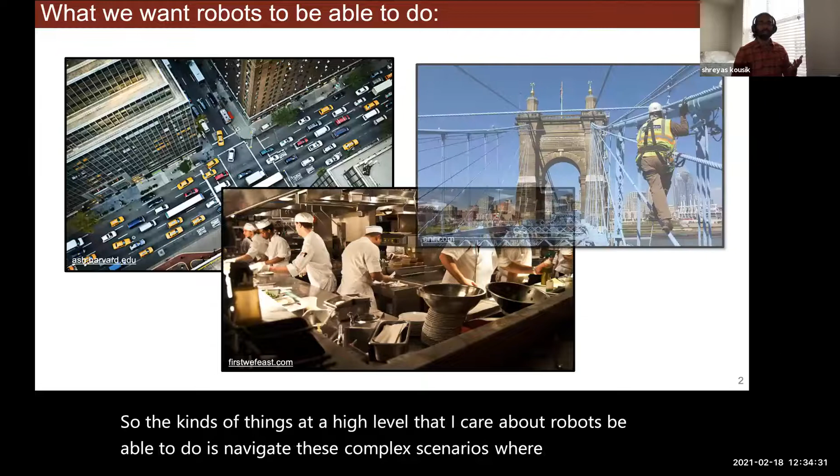So the kinds of things at a high level that I care about robots being able to do is navigate these complex scenarios where you may be interacting with humans or taking over jobs that are dangerous or difficult for humans to do.

However, to really accept these things into society, we need them to be safe. So we want to make formal guarantees about what they're going to do before we put them out into the field. However, that can often lead to conservatism. So the whole game in the motion planning world, as far as I'm concerned, is balancing safety and conservatism while still getting these robots to do stuff.

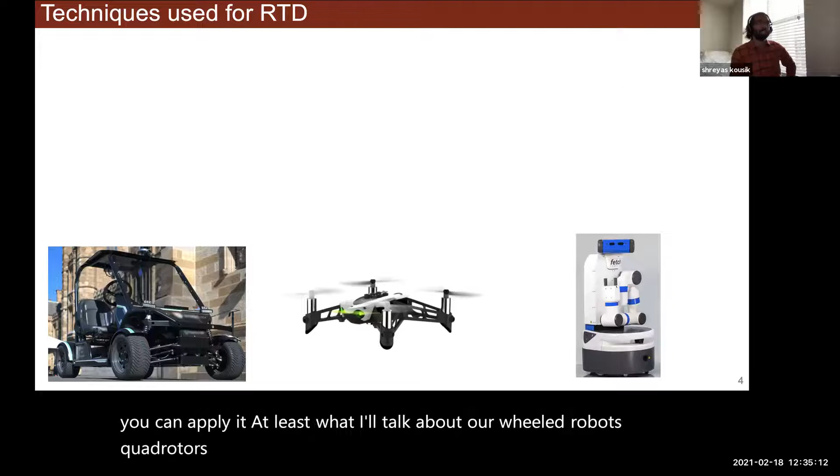RTD in particular is a technique that has grown out of a bunch of reachability analysis methods, which I'll discuss. You can apply it to wheeled robots, quadrotors, and manipulators most recently. The techniques we use to make this possible are split between whether they do things for safety guarantees or whether we're trying to do real-time planning. I'll also explain why the real-time aspect is important in a bit.

On the safety guarantee side, we spent a lot of time at Michigan thinking about how to model these systems and then learning about different reachability analysis techniques that make it so you can make strong guarantees. On the real-time planning side, I've spent a lot of time figuring out how to represent obstacles in a discretized way, or in general, in ways that make it tractable to solve non-convex, nonlinear optimization programs really fast. And we've also figured out ways to make it parallelizable.

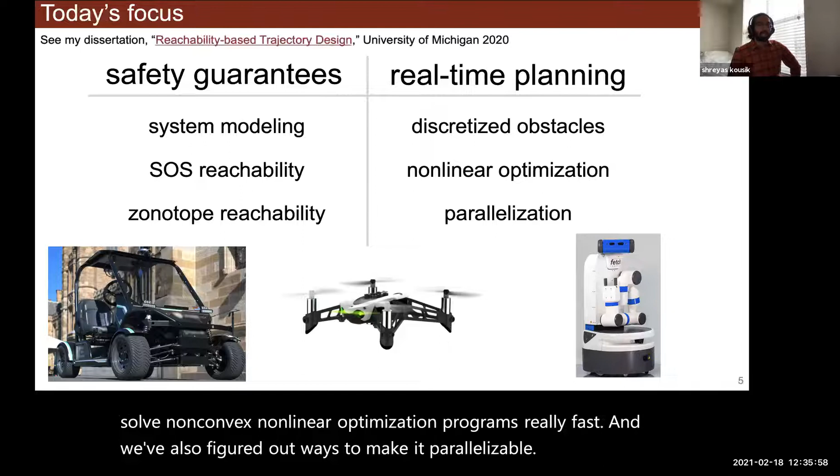I'd say for today, what we're going to focus on is the sums of squares reachability that we've applied to wheeled robots, and then Zonotope reachability applied to drones. On this slide, I'll reference dissertation chapters in case you're curious, because I think it's quite a gentle but deep introduction to all of these techniques.

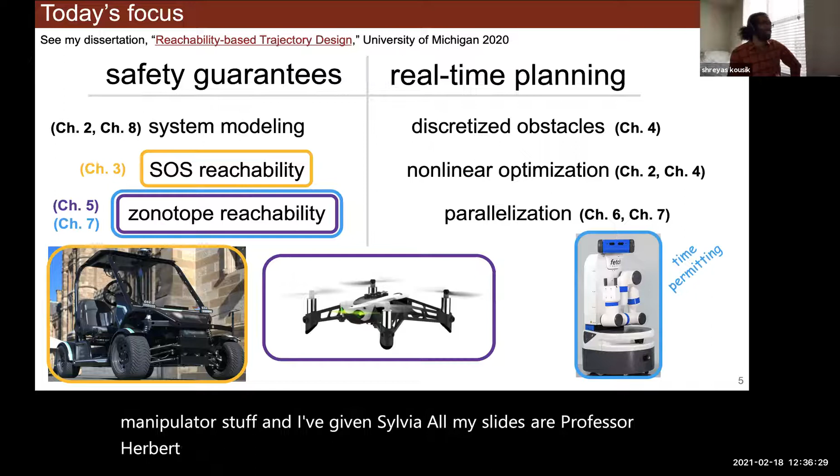Time permitting, hopefully we can get into the fetch robot manipulator stuff. I've given Sylvia, or Professor Herbert, all my slides so that you can all reference it afterwards if you need. So before we dive into anything, I'll just show you a little video.

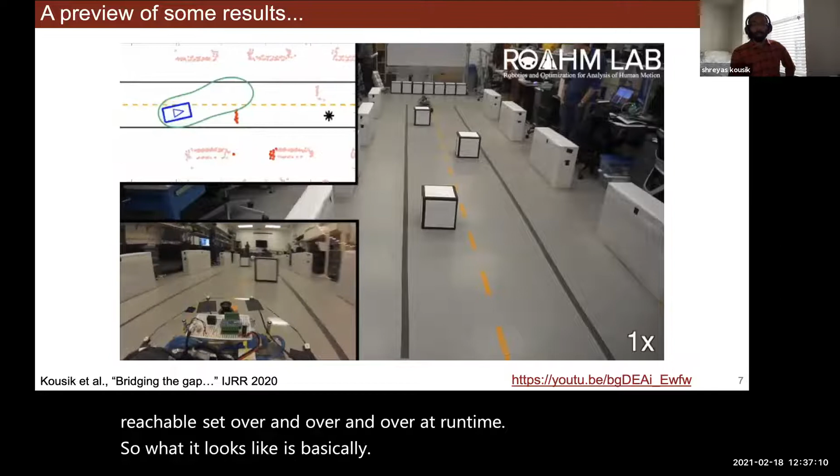Here we have this robot's own view of the world in the top left. We have a camera on the robot in the bottom left. We set up this little mock road and tossed some obstacles around. And then we give the robot a waypoint in a receding horizon way. It sees these obstacles detected with a LiDAR in red. It sees itself as a blue rectangle, and then it's computing this green blob, this reachable set, over and over at runtime. So what it looks like is basically what we hope to see: that the robot can do stuff autonomously and not crash.

I'll now explain what's going on behind or under the hood of that process. Before I continue, feel free to interrupt with questions at any time. Just unmute yourselves, that'll be the easiest for me.

All right, so first, some background. I'll try and relate this to what you already have seen.

Full disclosure, I just converted these slides from Michigan colors to Stanford colors, hence the left side of the road is now suddenly blue. So just ignore whatever conventions you know about driving. All you care about right now is safety.

To make a robot drive safely, we typically set up a receding horizon planning framework where the robot will be trying to get down the road, perhaps to this golden star goal position. Of course, there's stuff in the way, and the robot's sensing capabilities are not perfect, they are limited. So we adopt a receding horizon strategy, wherein we set up a waypoint, something intermediate between where the robot is and where it needs to go, plan a short trajectory using ideally a simplified planning model that is really fast for computation. And then the robot does what it wants to do to track that trajectory, which may not be perfect.

Often we can describe the motion of the robot with what we call a high fidelity model. And you'll notice that both of these models are written as ordinary differential equations. That's the way I'll be talking about modeling a robot throughout this talk. But I can relate this to other types of models you may have seen in the literature later on. Anyways, by repeating this process of setting up a waypoint, planning a trajectory, and tracking it, ideally we can eventually get our robot to the goal.

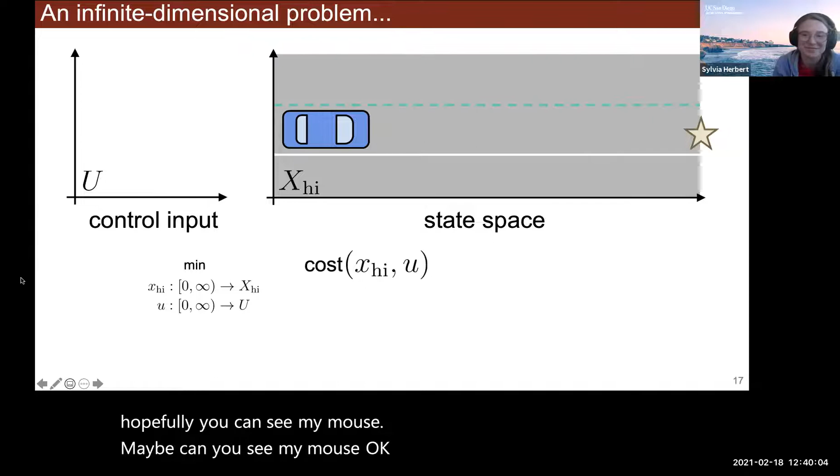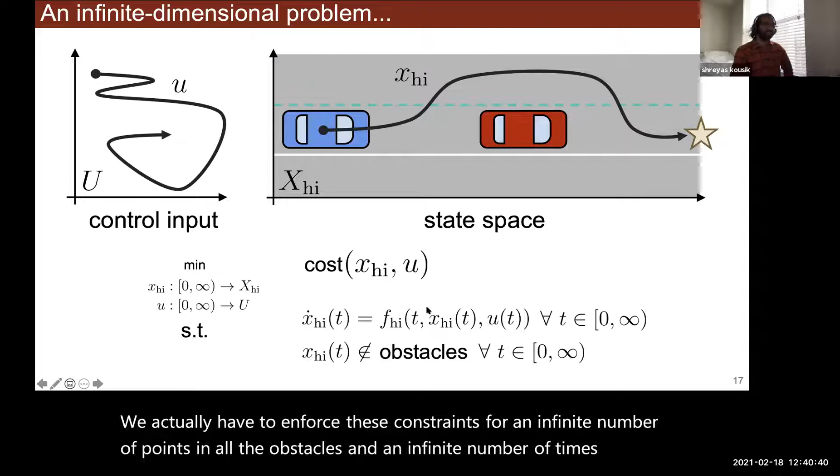So we want to minimize over the trajectory of the robot and its control inputs for perhaps for all time, some arbitrary cost, subject to the fact that we have a high fidelity model, and we don't want that model to intersect with obstacles in its position or workspace coordinates. So an optimal solution may do some wiggly thing in the control space, and it'll produce some good trajectory in the state space. Unfortunately, we actually have to enforce these constraints for an infinite number of points in all the obstacles and an infinite number of times. So it is an infinite dimensional program because the size of the decision variable space is infinitely large.

You can never put this on a computer, but you can always represent a finite dimensional problem on a computer. In the RTD case, we've taken a particular tack that lets us get to that finite dimensional computational representation. The first thing we do is we minimize over what I'll call trajectory parameters, and I'll illustrate what those are shortly. So this is drawn from a finite dimensional space, and the cost is translated into this finite dimensional variable. We then represent obstacles in this space, and then we decide what trajectories to choose over this, the complement of this unsafe set, let's say. We also choose a finite amount of time. And in fact, we represent the entire interval, not just discrete points in the interval.

So we're still, in some sense, solving an infinite problem, but we're very clever about how we represent it. Hopefully, this problem looks a little bit simpler to solve. And if you're not familiar with this type of optimization notation, don't worry, you'll see lots of it, and I can explain it in more detail as we go. A solution to this problem might look like this. And then we'll solve this little problem that you see down here over and over and over as the car or robot in general is moving through the world.

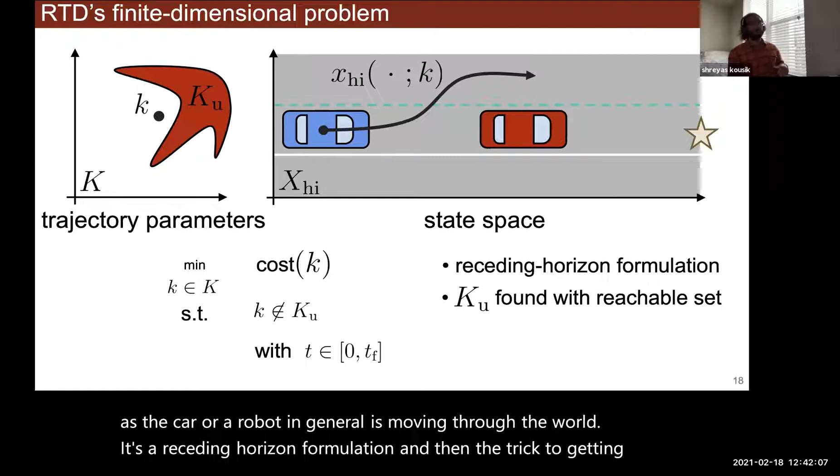It's a receding horizon formulation. And then the trick to getting this unsafe set is to use reachability analysis over and over and over.

Now, to ground this in a broader context, let me talk about where RTD fits in the scope of other methods. Typically, for making a robot move through the world, we look at a high-level planner that ignores the dynamics of the robot and generates those waypoints that you saw. This hands its output to a trajectory planner that tries to compute some short trajectory to achieve a goal. And finally, a tracking controller tries its best to track that trajectory perfectly. At the high level, you may be familiar with rapidly exploring random trees or A*, prototypical high-level planning algorithms that will spit out waypoints really fast, but they pay a trade-off the more complex you try and model the dynamics in these types of planners.

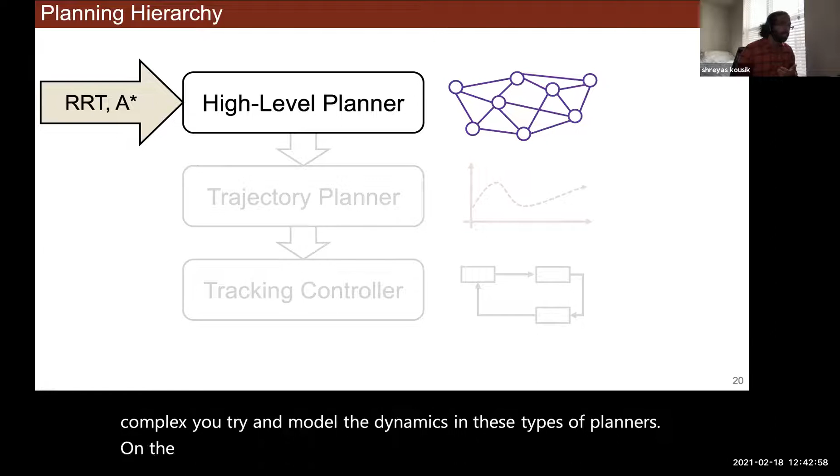On the other hand, at the lowest level, well, here we go. I'm skipping a couple slides. Okay, at the lowest level, you may see things like control barrier functions or model predictive control. And I believe Jason Choi gave a talk about CBFs. I'll point out in cartoon form how this works.

But the idea of this is, given a trajectory, how do I track it as well as possible? Mostly this cartoon is just to give you guys a short illustration of FaSTrack, which I think is super cool. So imagine I have my car and it's allowed to do whatever it wants in the world, and I just have to track that decision as well as I can. If I can compute a reachable set of the tracking error, then at runtime I can use that reachable set to essentially dilate obstacles. And so no matter what my plan for my car does, as long as it lives outside of these dilated obstacles, I know my car will not crash despite tracking error. So this is the type of object you can get from Hamilton-Jacobi reachability.

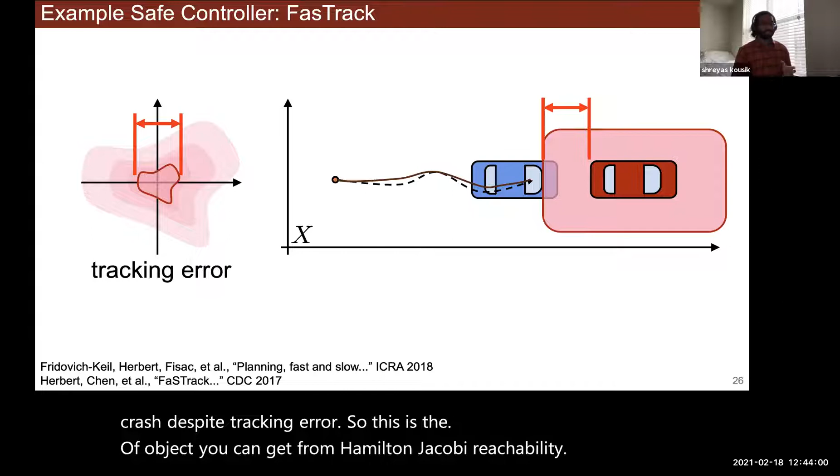So a similar technique is to apply control barrier functions. Often what you'll see is a nominal trajectory. In this case, let's say we're driving in a straight line, and that corresponds to some nominal control input shown on the left. When an obstacle appears, we want to construct constraints on the space of control inputs, and then solve a quadratic program that minimally corrects our control input. So we want to be as close to what we were trying to do while still being safe.

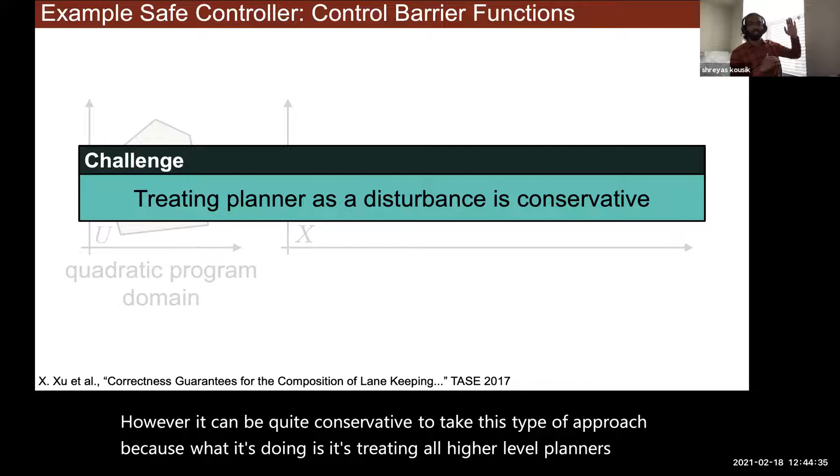However, it can be quite conservative to take this type of approach, because what it's doing is treating all higher level planners as a disturbance to the system. So that can be quite conservative. And hopefully you all have heard a little bit about this and have thought of ways to combat that conservatism. A bonus challenge specifically for CBFs is we don't know if that quadratic program is always feasible. Sometimes it is, and it's really cool. There's a work from Sam Coogan at Georgia Tech that recently shows how to ensure that that program is feasible. So it's not a problem that's unsolved, but sometimes it is. It's something to be cautious of.

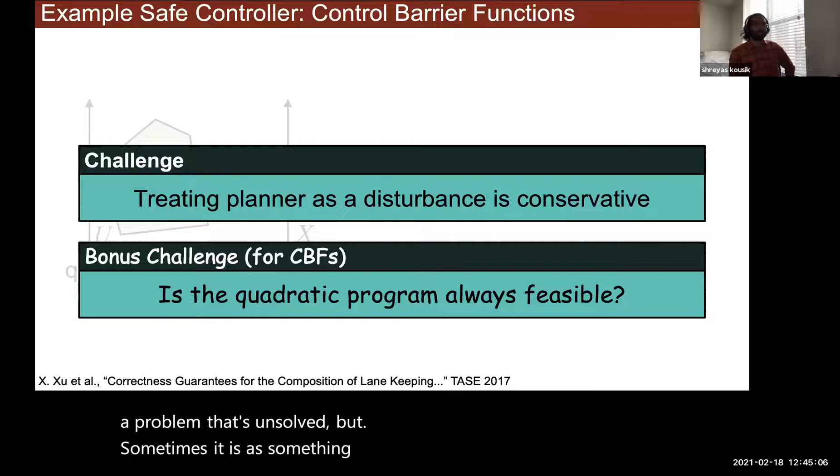To summarize this sort of literature review, RTD fits in right in the middle here. It's a trajectory planner that balances the model fidelity that would make high-level planning intractable and the conservatism that you can see with certain types of low-level tracking controllers by enforcing safety at this trajectory planner level. And at the end of the talk, I'll discuss why that's good and why that's bad.

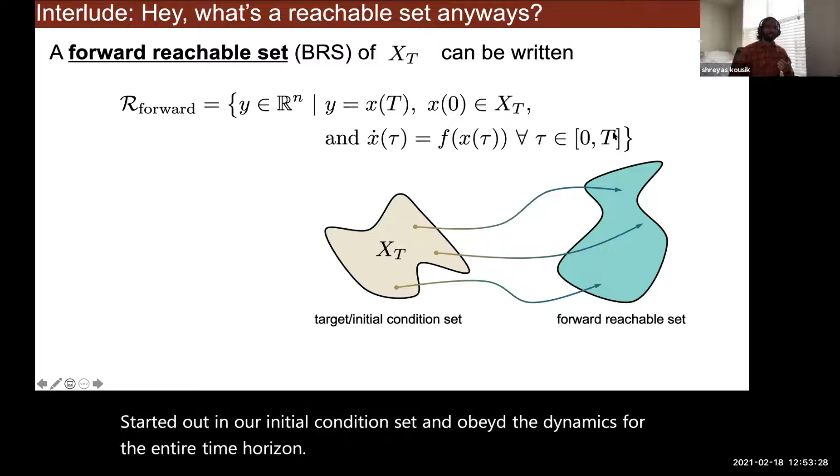We will also consider reachable tubes. In fact, all of the things that I'm calling reachable sets in this talk are actually reachable tubes. I haven't made the distinction between tubes and sets in my work, but if you're more familiar with the tube lingo, then think of all of the objects I talk about as reachable tubes.

I'll talk about wheeled robots, and I also point out none of this is solo work. All of these things have been put together by a lot of people working over many years, so I'll show their faces and names as we go.

In the wheeled robot case, I'll discuss how we parameterize trajectories, how we compute the forward reachable set offline, and then how we represent obstacles online. That's where I'll answer the dynamic obstacles question.

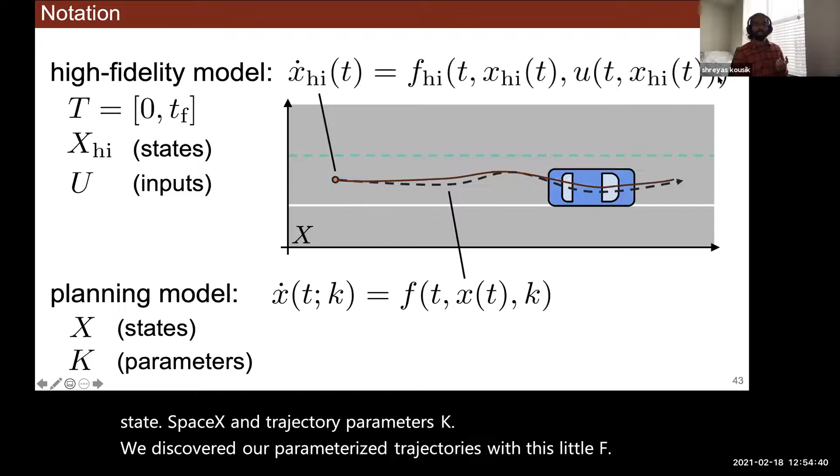For notation, as a reminder, our high fidelity model, our accurate description of the car, has time in this interval, high fidelity states and inputs. Our simplified planning model has a lower dimensional state space x and trajectory parameters k. We describe our parameterized trajectories with this little f, and our high fidelity model trajectories with this f high. Hopefully the notation will be very clear, and you should have the PDF of these slides to reference later as well.

Our trajectory parameterization: we found that just computing these Dubins path like arcs pretty much always works for cars because they're pretty short. What we do is parameterize a speed and yaw rate profile that travels at a constant for some time and then brakes down to zero at this final time in each plan.

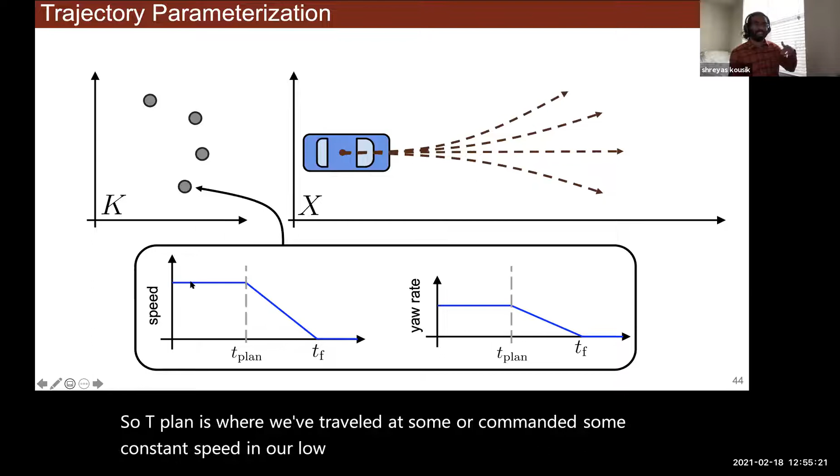T plan is where we've traveled at some commanded constant speed in our low dimensional model, and then we rely on our high fidelity model and tracking controller to track that behavior. By incorporating this type of braking maneuver in every single trajectory, no matter what we're doing, we always have a braking maneuver available as we stitch these short trajectories together over and over through time.

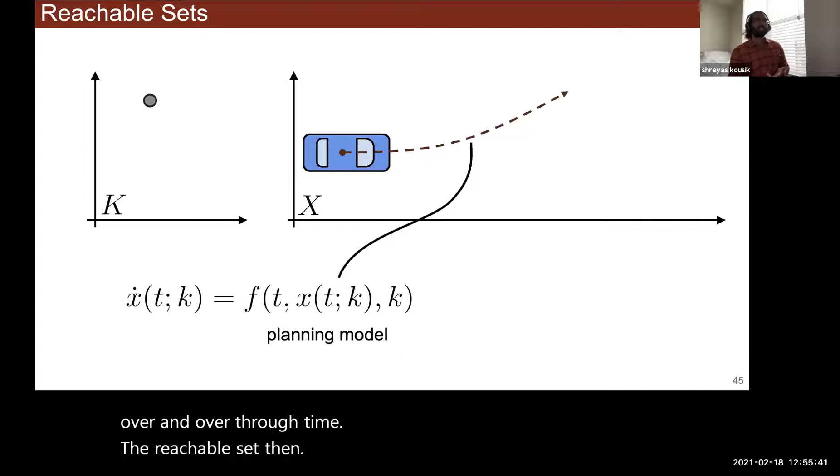The reachable set then is, given a trajectory of the planning model and whatever our high fidelity model may do, a blob surrounding that planning model trajectory that incorporates the behavior of the whole vehicle. We represent this as an additional G function, representing the tracking error, multiplied by a disturbance D. These two things together are what I call the tracking error model.

The disturbance in particular just goes from -1 to 1. So the idea is, if you can hold on to the tracking error conservatively, then you can solve basically this differential equation in a clever way and hold on to all possible trajectories despite tracking error.

Assuming this G function upper bounds the possible tracking error, you can choose that disturbance to basically drive the planning model trajectory, the simplified trajectory, to exactly match any of the high fidelity model trajectories in the states that you care about, so that lower dimensional state space.

Now, how do we actually hold on to this object on the computer? Consider again our simplified model, and this G function may look like this. This is taken from a bunch of traces of that rover robot you saw at the beginning of the talk. Then we fit G to upper bound all of the tracking errors.

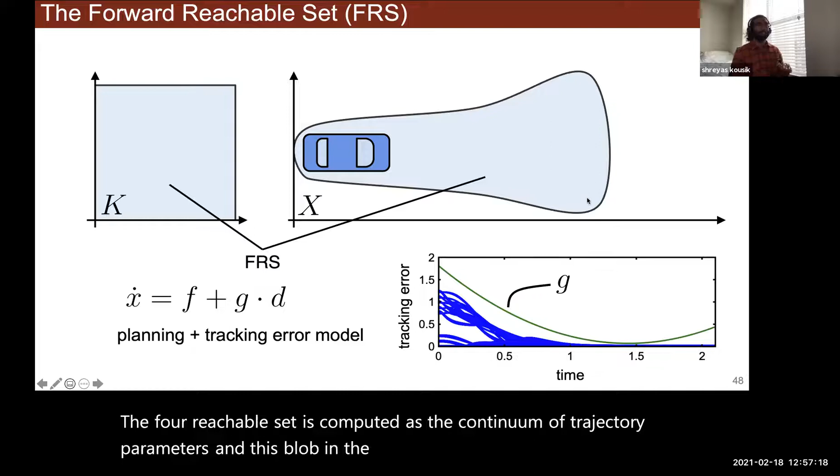The forward reachable set is computed as the continuum of trajectory parameters, this blob in the robot's lower dimensional planning space, using a sums of squares program, representing this blue forward reachable set object as a polynomial W.

We can show that given a point in workspace and in the parameter space, in this higher dimensional forward reachable set, the polynomial is greater than or equal to 1 on that point. So to test if I'm inside or outside the reachable set, I can just evaluate a polynomial and check if it's greater than or equal to 1.

So how do we compute that polynomial? Here's where sums of squares reachability analysis is the particular tool that we use, and that you can see in the RTD tutorial and the RTD repository for the Segway and the rover.

To compute the reachable set, we begin by setting up an optimization program where we're trying to optimize over these 3 polynomials, and we're trying to minimize the volume of W, so the integral over the states and parameters of whatever W is.

If we were to take W out to be a polynomial of infinite degree, then it would converge to an indicator function just on the FRS — 1 on the FRS and 0 everywhere else.

We add constraints to enforce the dynamics. So this V object here is basically acting as a Lyapunov function. It'll be negative and decreasing along trajectories.

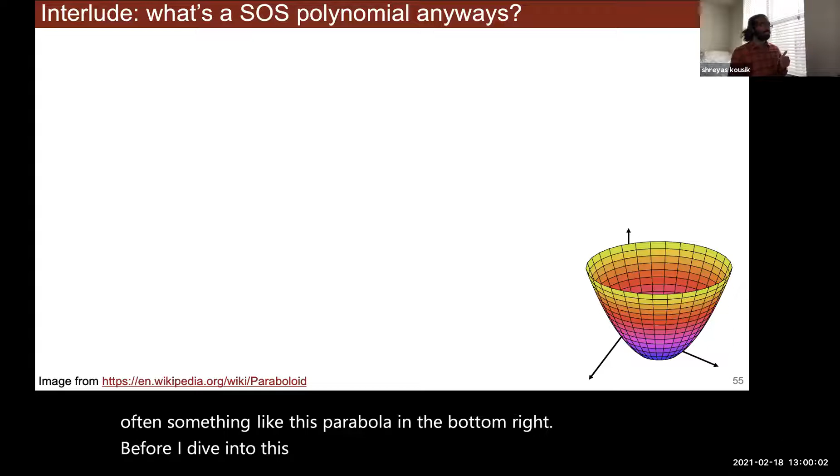Okay. Suppose we have some point in Rn and some arbitrary monomials. I've written the monomials as a function m, where I plug in x, and it's just some polynomials with only one term in the variables of x, or in the coordinates of x, let's say.

Suppose I have a matrix Q, a square matrix that's positive semi-definite. If you're not familiar with what that means, I don't have a definition in the slides for you, but you can — well, I'll leave the specific definition for later — think of it via the example on the next slide. That will be probably the easiest way to understand it.

If I write down a polynomial P, written as this M Q M transpose object, you can think of this as the dot product of M, these monomials, with themselves, multiplied through by Q. So this is a generic quadratic form.

Then what we've done is summed the squares of all the monomials with some coefficients. As long as the coefficients are chosen carefully, which is equivalent to Q being positive semi-definite, then we know that the polynomial P is positive everywhere.

So it takes an n-dimensional number and spits out a positive real number. Therefore, if we can find a sums of squares polynomial, then we can say that it's positive on the sets that we care about.

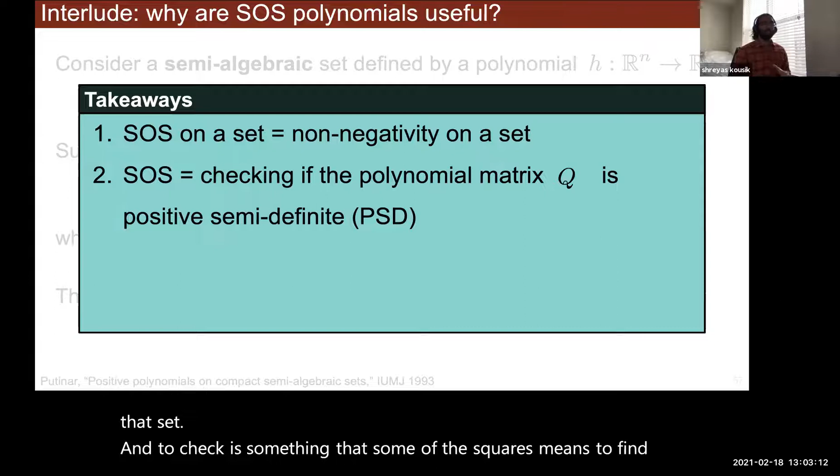Okay, so that was a lot of math to throw at you, but the big takeaways here are: sums of squares on a set is equivalent to non-negativity on that set. And to check if something is sums of squares means to find that positive semi-definite Q matrix that I mentioned earlier.

Critically, finding such a matrix can be done with semi-definite convex programming. It'll take a lot of memory because you're representing really large matrices, but it's convex, so it comes with optimality guarantees. This is the root of proving that we will find a polynomial that's greater than or equal to 1 on the reachable set. By representing everything with sums of squares polynomials, we can actually prove that this property holds.

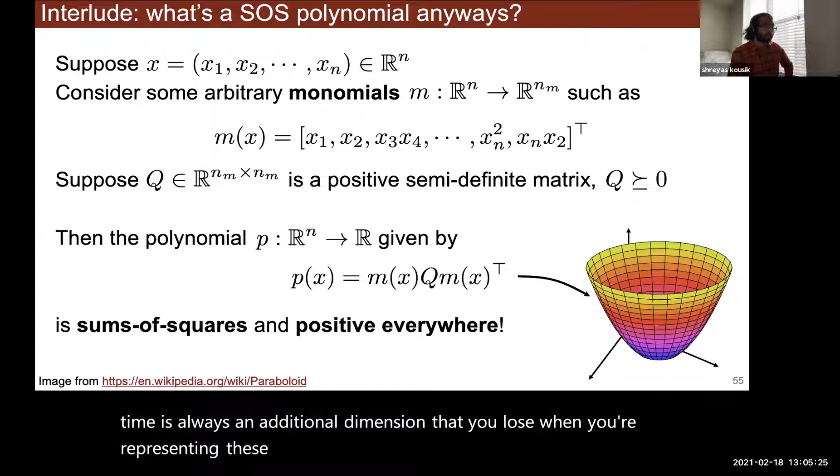It can be. So we've gotten up to 5 dimensions. Annoyingly enough, time is always an additional dimension that you lose when you're representing these things. So it's 4 dimensions plus time for all the wheeled robot stuff. 2 workspace dimensions, 2 trajectory parameter dimensions, and time.

The tricky part then is to be more clever about scaling it up. There's ways to do it with exploiting sparsity, so sparse sums of squares optimization. The problem is then the reachable set becomes much more conservative, so you end up with lower degree or less expressive shapes. Instead of a shape like the wibbly wobbly H thing that we saw earlier, you'll just get paraboloids or ellipsoids. That's the trade-off you pay with these polynomials.

And that's also why I haven't used them in a couple of years, because I thought zonotopes are cooler. We'll talk about zonotopes in a bit. Oh, Zootopia is apparently the subtitle for Zonotope.

That's great. Quick question. So you're saying that if the degree of polynomial is bigger, the rate of convergence is bigger too? Like how is it different in terms of rate of convergence?

Off the top of my head, I don't know. But in general, the semi-definite program that you set up is going to run much slower. That speed is because you're trying to hold on to a really large square matrix in memory, and you're holding on to just more stuff. So it's going to go slower.

I don't know what the rate is in terms of the rate of convergence as a function of the dimension or the degree. My understanding is it's exponential or close to exponential, which is unfortunate. And in practice, that's what I've seen as well. These things tend to blow up in how long it takes to solve.

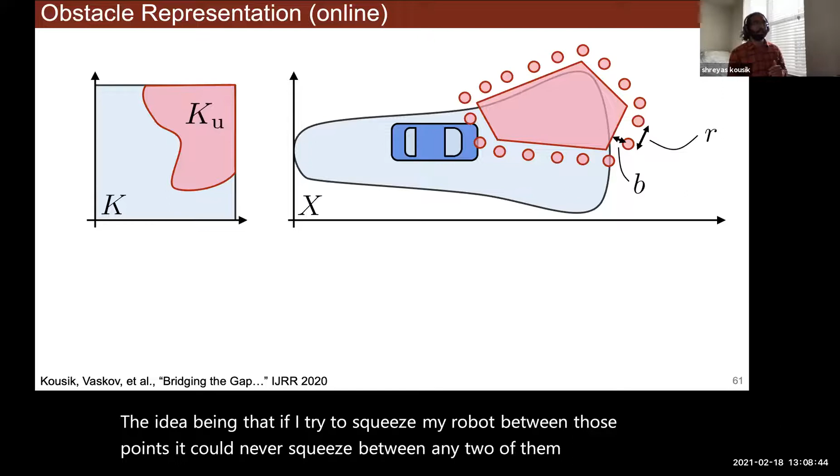So we prove that such a spacing exists for arbitrary polygonal obstacles, and that they're bounded when my robot is convex and compact. The reason this is useful is because if I have a finite number of points equivalent in some sense to my obstacle, then I can say, if I evaluate my forward reachable set polynomial and it's less than 1 on all of the points in the discretized obstacle, then I've chosen a safe trajectory parameter.

So what I've done is taken an infinite number of points and turned it into a finite number of points. And I can actually evaluate safety by evaluating a polynomial a finite number of times, which is super duper fast. So it might look something like this.

When I evaluate W on all of these points, it'll be a bunch of little blobs that provably cover the unsafe set. If I then choose a safe trajectory parameter, I know it avoids collision with all of these points, so it avoids collision with the obstacle.

This is strict inequality here, not less than or equals. So in practice, we pick some small epsilon to enforce this constraint.

But wait, dynamic obstacles work too in the same way. Suppose I'm given a prediction of a dynamic obstacle. And I'll point out, and hopefully you've noticed, I have not talked about perception at all through this talk. This is purely how do I plan once I know about the world. So if someone gives me a prediction of what another robot or vehicle is going to do, we can still find this unsafe set by discretizing in space and in time.

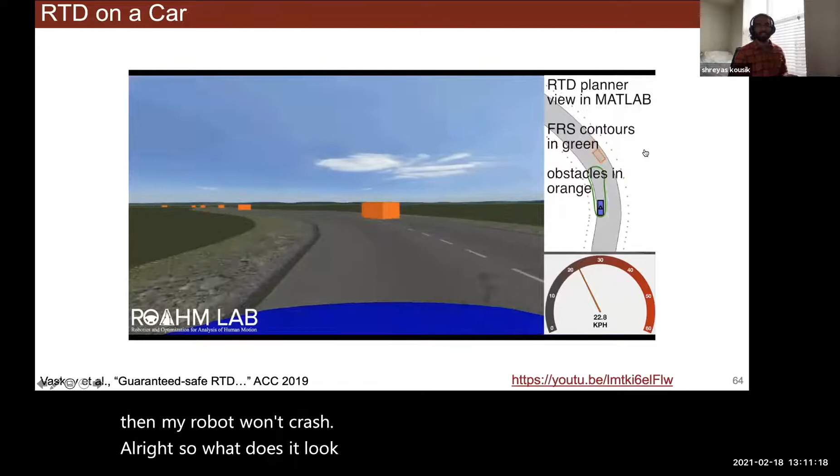All right, so what does it look like? Here's a car driving around with just random static obstacles on a 1 kilometer test loop, up to 35 miles per hour, which is the speed limit of the test loop. So we didn't pick that for any particular reason. It autonomously decides to make these lane change maneuvers around the boxes. And it slows down for corners because it knows it can't actually make the corner if it's going too fast, because the reachable set won't fit inside the road boundaries that we also show as discretized obstacles.

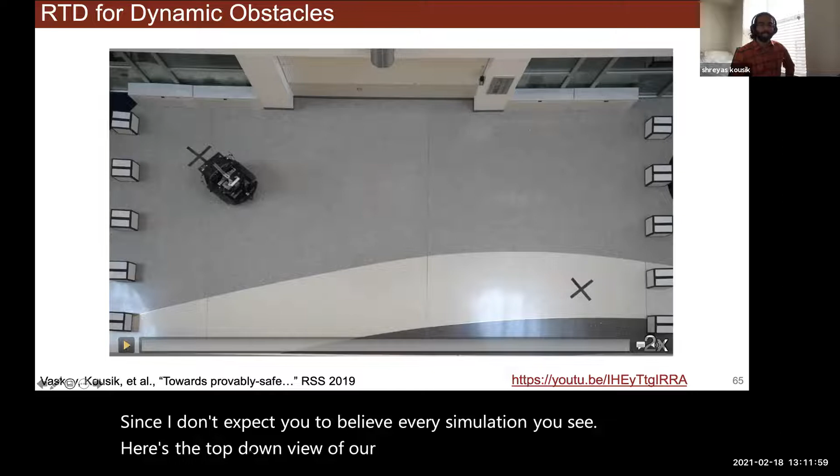Since I don't expect you to believe every simulation you see, here's the top-down view of our Segway robot at the University of Michigan, and it's going to dodge these dynamic obstacles.

Unfortunately, in this case, what we did is the obstacles don't react to the Segway at all, which turns them into really mean obstacles. It's like if you were walking towards somebody and they just walked right into you. So these scenarios all became really hard for the Segway to solve above 2 obstacles.

However, over many such scenarios, importantly, the Segway never caused a collision. It would always come to a safe stop, and then somebody else may come run into it. So we started discussing a notion of fault in a collision in the dynamic case. Things get a little muddy once you start talking about the possibility that other robots may come run into you, or other agents may come run into you.

Okay, so that covers at a high level, that gives you a flavor for how this works on the wheeled robot side. And I have a link to the tutorial, which goes into much more detail about all of this, but still in a gentle way.

I'll now discuss aerial robots, quadrotor drones in particular, to introduce a different way of computing that reachable set. Before I proceed, are there any questions on the wheeled robot side?

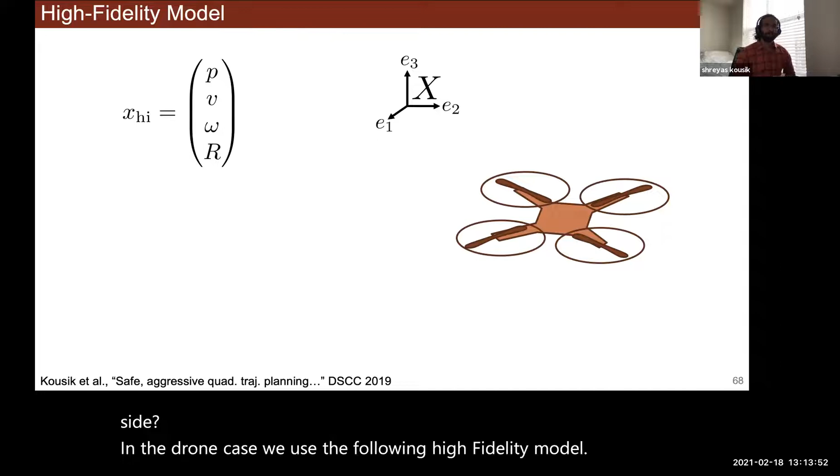All right. In the drone case, we use the following high fidelity model. We consider a three-dimensional workspace, and we look at the robot's position, velocity, angular velocity, and then R is a rotation matrix describing the attitude of the robot.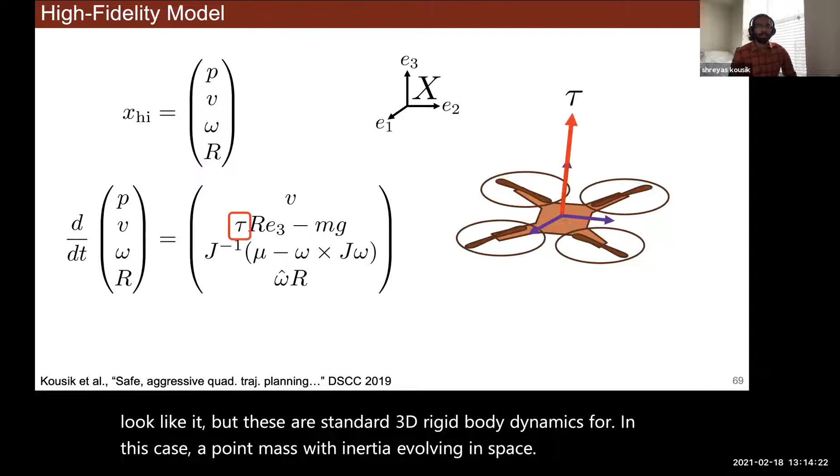One way to write down the dynamics here, maybe this doesn't look like it, but these are standard 3D rigid body dynamics for, in this case, a point mass with inertia evolving in space. The control inputs to the robot are the thrust, tau, and the body moment, mu.

And in general, planning with this model in real time is hard. However, some of you may be familiar with the differential flatness property of a quadrotor, where you can plan with a much simpler model and then track that much simpler model with all of the states that you see here on the left. That model in particular, we simplify by using these trajectory parameters.

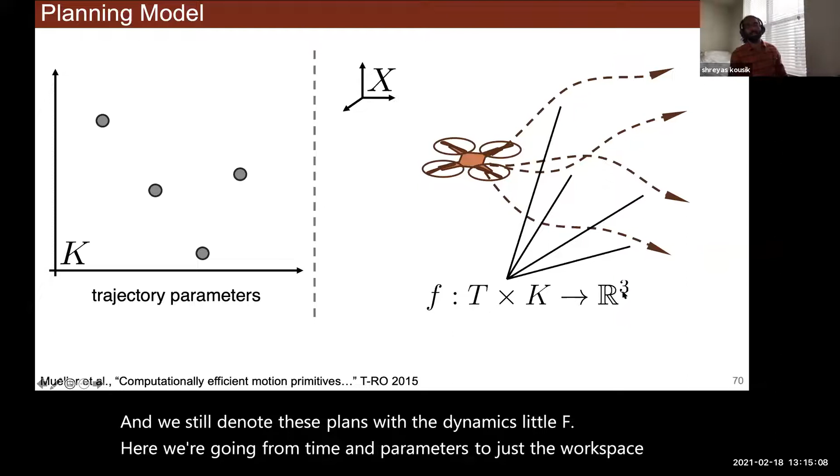So each point in the space, again, is a single plan in the workspace on the right. And we still denote these plans with the dynamics little f. Here, we're going from time and parameters to just the workspace. So R3, in this case, we specify the velocities of the center of mass of the robot, which is a lot less to specify than the velocities, angular velocities, and attitude matrices.

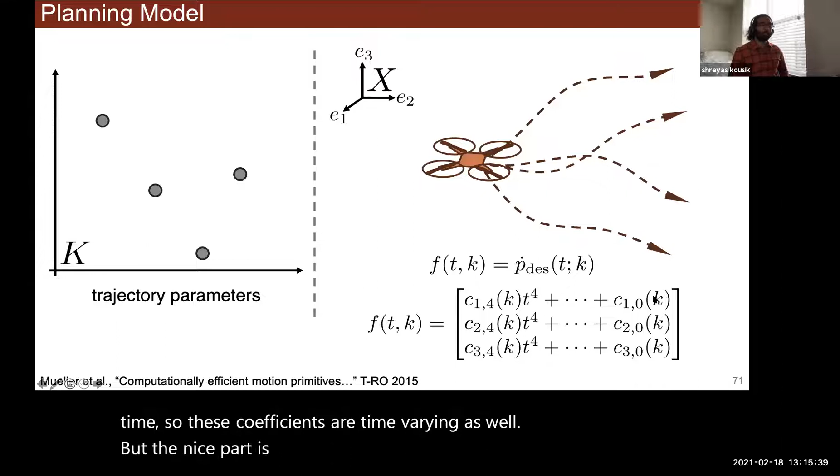So what you can think of this as is my simplified planning model specifies the velocities as a function of time and the parameters. And in particular, we construct these as polynomials that are piecewise varying in time, so these coefficients are time varying as well. But the nice part is then I have decoupled planning dynamics because I'm just looking at a separate polynomial in the X, Y, and Z dimensions of my robot.

This means I can actually compute a reachable set without having to compute the reachable set directly of the high dimensional model. To give you a feel for what this parameterization looks like, let's look at just one trajectory.

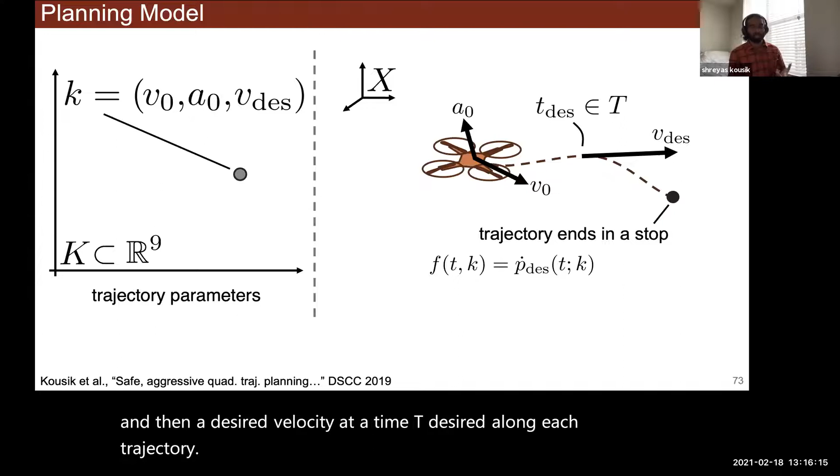In particular, we have a 9-dimensional parameter space where our parameters are the initial velocity, the initial acceleration, and then a desired velocity at a time t desired along each trajectory. As before, every single trajectory ends with a stop so that as we're finding these online, if for some reason we can't find a new one in time, we can continue our previous one and come safely to a stop.

The challenge is, well, the first challenge you'll see is that this is a 9-dimensional space plus 3 dimensions plus time, but we can make use of that separability property where we're computing it separately for the 3 spatial dimensions to compute smaller reachable sets and stitch them together.

Can I ask a quick question? Yeah. So for the previous slide, the trajectory parameters that you chose, for someone who has some model and they would like to have this trajectory space, how did you go about choosing these as being the trajectory parameters?

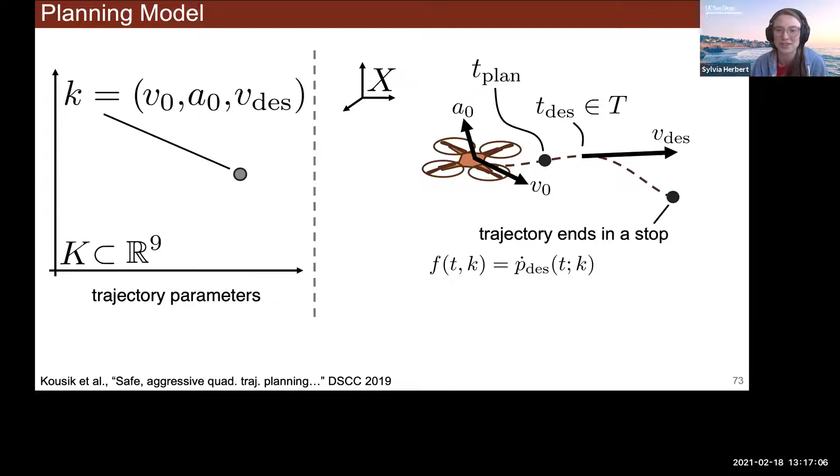So if it is intuition, then it's an intuition we built. We found that tracking error is proportional to the initial velocity and then the commanded change in velocity. By including the initial acceleration, as opposed to allowing any possible initial acceleration, my tracking error is much lower. The experience side was noticing that the first thing I tried was saying okay, all I care about is my initial condition, so initial velocity, and then a final position, which seems like a nice thing for a drone. The problem is when you compute those polynomials, for which there's an analytic expression to go from these parameters to the polynomial, if you plug in a final position, you have no clue how that polynomial is going to evolve. It may do something really, really weird.

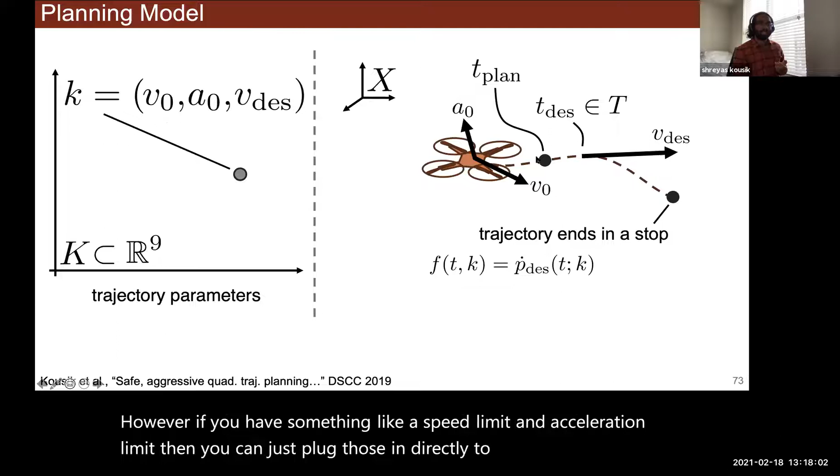However, if you have something like a speed limit and an acceleration limit, then you can just plug those in directly to these trajectory parameters. The nice part is that we don't really care what the parameterized trajectories do, because we're going to pick the best one we can at runtime. So the shape doesn't matter so much, which is how we ignored position entirely and just cared about velocity and acceleration, since those are the quantities we cared about bounding in the performance of the robot.

Cool, okay, that makes a lot of sense. Thank you. Yeah, I'll also have a link to a paper at the end of the talk where we plug this into a reinforcement learning framework.

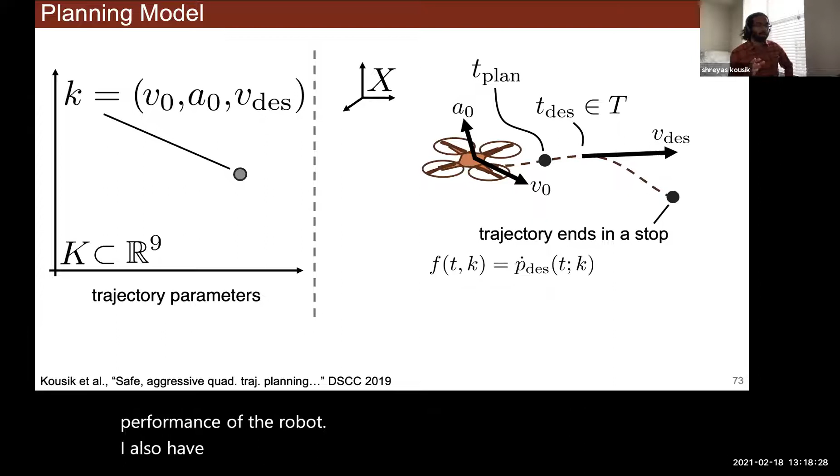My student Simon discovered that this parameterization basically works all the time for every robot. I've used this parameterization for manipulators, and Simon used it for highway driving, where it's separated into longitudinal and lateral velocities and accelerations. So in general, for a physical system, these are the quantities you care about. Thanks.

So what we're trying to handle is this nonlinear, high-dimensional, high-fidelity model, and we also want to incorporate tracking error into planning. To do this, we'll compute a reachable set, just as we saw before.

To compute the reachable set for the drone, let me quickly talk about what a zonotope is. Imagine arbitrary dimensional Euclidean space. I'll construct a set Z centered at a point C, where I take the convex combination of C with vectors that we call generators. So what I'm doing is a Minkowski sum, or set addition, with each generator, and if I let the coefficients of these generator vectors vary between -1 and 1, it sweeps out this volume that we call a zonotope. This is a special kind of convex symmetrical polytope.

If you're not familiar with it, the rough idea is that you're just adding a bunch of line segments together and sweeping out volume in space.

The nice thing is, computationally, we can write this down as a center plus a generator matrix. So I stitch together my 3 generators in this particular case, times B, a multidimensional interval, which you can think of as the unit hypercube in the dimension of however many generators I have, or just think of it as all of these beta-i variables stacked together. So we get a super compact, computationally efficient representation of a set that's convenient for reachability.

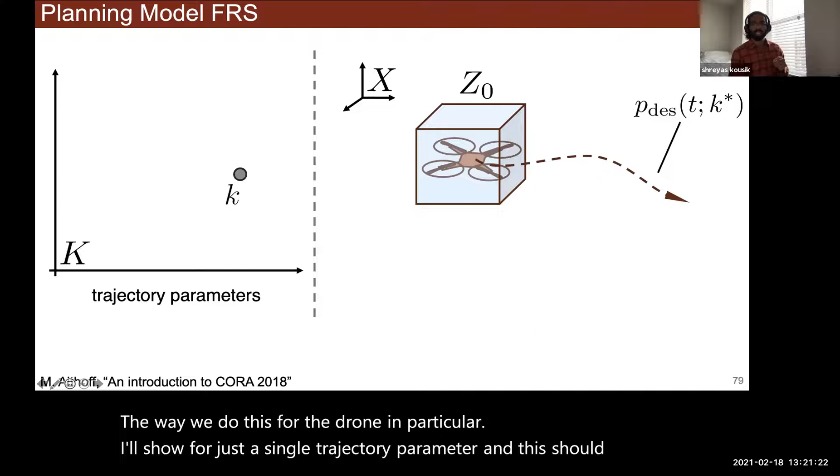The way we do this for the drone in particular, I'll show for just a single trajectory parameter, and this should have a star on it. So this K star is the same K here, pardon the typo.

The first thing we do is take our time interval. Hopefully you remember from earlier in the talk, we have each trajectory over this little 0 to TF chunk of time. We break it into a bunch of little intervals, and if there are n of them, we're going to compute n zonotopes. We start with a Z0 initial condition zonotope, and then we apply the following procedure.

Oops. Okay. Sorry, like I said, a little bit untested slides.

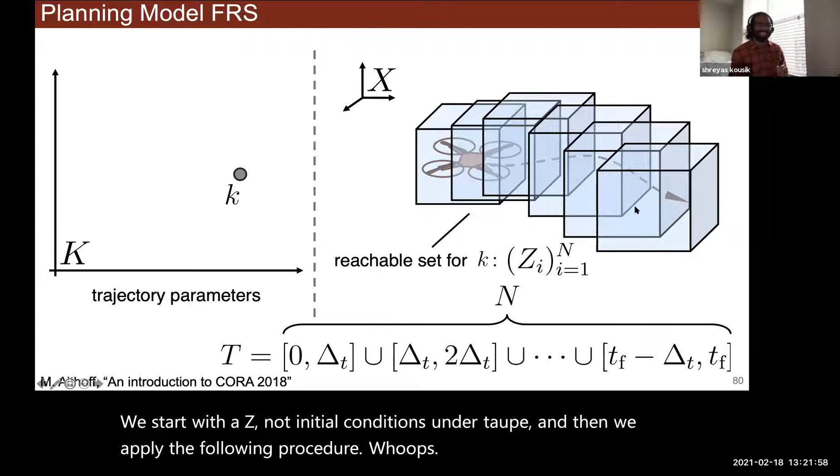But anyways, we get a reachable set as this sequence of, in this cartoon version, boxes. They're not necessarily boxes in application. The particular toolbox we originally used to compute these objects is called CORA, available for free as a MATLAB toolbox online. More recently, I've started just doing it myself, since it turns out these linear maps and Minkowski sums and similar operations are not so hard to plug in, but there are existing convenient tools for computing these types of objects.

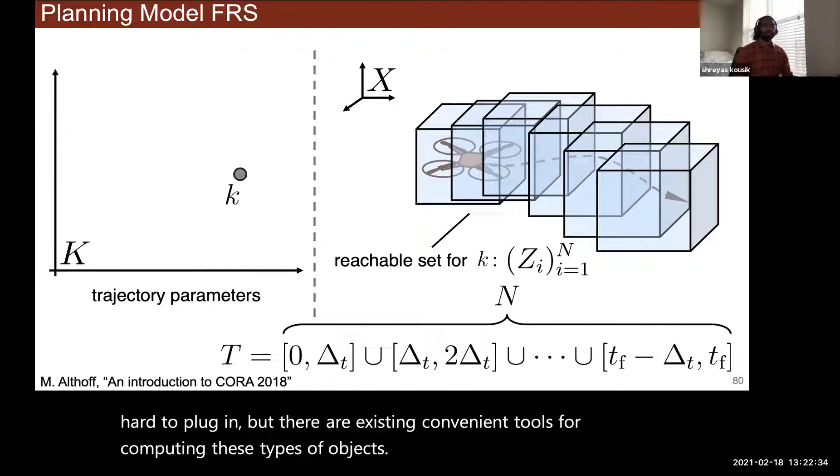Now, I'll point out that we don't just do this for a single trajectory parameter, but rather a continuum. So we set up our initial condition zonotope in this higher dimensional K cross X space, parameters cross with workspace. And then we compute a sequence of zonotopes in this high dimensional space, which is a forward reachable set, but just for the planning model in the case of the drone.

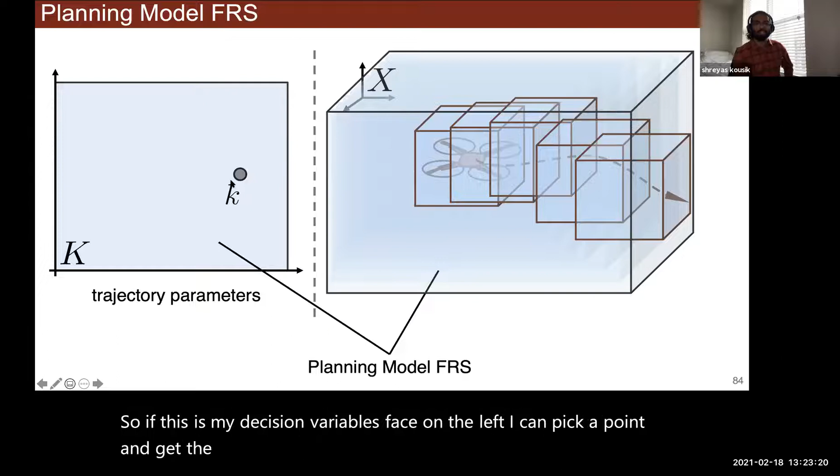The nice part is, because of the Minkowski sum property I mentioned earlier, we can now add tracking error to this. Critically, we can also back out a subset of this high dimensional set corresponding to one trajectory, a procedure we call slicing. So if this is my decision variable space on the left, I can pick a point and get the small reachable set corresponding to just that trajectory by basically doing a linear operation on the high dimensional zonotope.

Okay, before I dive into the tracking error idea, are there any questions about zonotopes or the planning model reachable set? All right.

So how do we deal with tracking error? As a quick cartoon reminder... go ahead. Just doing these zonotopes and the linearization and incorporating error compared to the sum of squares thing, how much more conservative does it tend to be? And I assume the benefit is it's much more scalable.

That's right. So the conservatism, it's hard to say because you can sort of pick a trade-off in complexity versus conservatism with the zonotopes. If you have more generators, you can get a more blob-shaped zonotope initially, and it will be less conservative but more computationally expensive at runtime, and even offline. If you do it the simplest way, where you just put boxes around everything, it's super cheap and it'll be a lot more conservative than the sum of squares version, like a lot more conservative.

So picking the generators, how finely you discretize time, or partition time, since you're still considering the continuous time case, and then the system dimension—all of these parameters are sort of hyperparameters to play with to figure out how conservative you want to be. In the sum of squares case, the hyperparameters were the polynomial approximation degree and dimension. In the zonotope case, it's again the dimension, but then the zonotope particular parameters. There's no clear answer off the top of my head which one's going to be better.

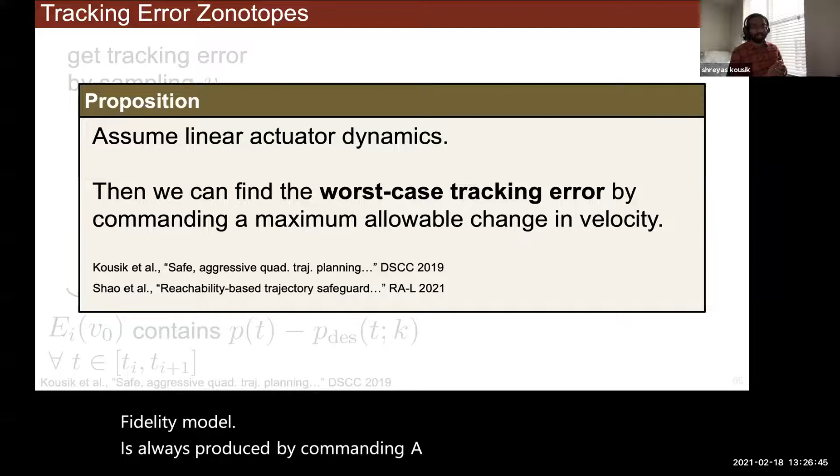So what we can do is prove that if we have linear actuator dynamics, then the worst case tracking error for the high fidelity model is always produced by commanding a maximum allowable change in velocity. If that sounds like it makes sense, good. Basically, I'm going to have more error if I suddenly command 5 meters per second from 0 than if I command 2.

That should totally make sense, but we confirmed it, at least formally, somewhat. All right, so this trick then lets us do reachability analysis on the high fidelity model of the robot.

What we do is we take our blue reachable set from the simplified planning model, shown in the dashed line here, and add these two reachable sets together, leveraging that Minkowski sum property you saw earlier, to get a yellow reachable set that encompasses the fact that I'm not going to track the trajectory perfectly. So my planning model reachable set plus my error reachable set, which is a function of the velocity, contains the robot at each time. Then if this yellow tube lives outside of obstacles, we're golden.

All right, so assume that this holds. Yes, we've recently proved why it should hold, but I think the proof needs to be stronger. So if anybody wants to go do some proving, boy, do I have a job for you.

Under the reasonable assumption that we can compute a high dimensional reachable set of the tracking error, we just add that to our simplified reachable set and we're good to go.

We have an FRS for this high fidelity model of a drone. In particular, the reachable set is a sequence of big N zonotopes, where each zonotope is in the workspace X and the parameter space, and then our tracking error zonotopes are, for the particular case of the drone, 3-dimensional.

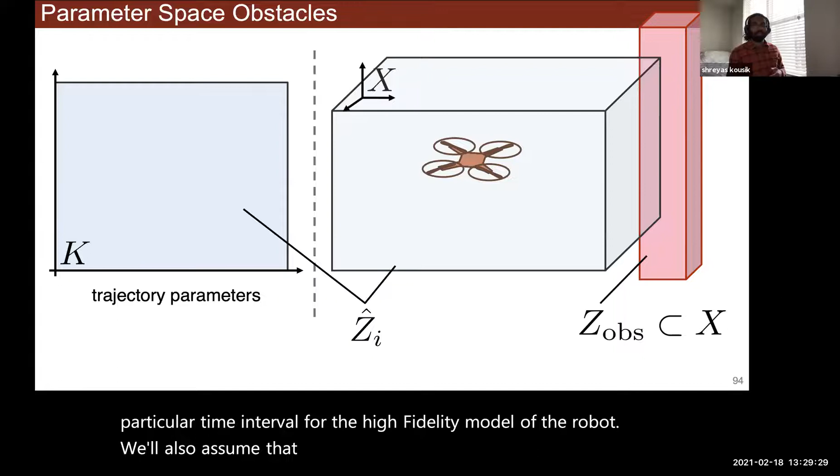We'll also assume that our obstacles are zonotopes, which is not unreasonable because zonotopes can model cubes, boxes, any convex symmetrical polygon. The question then is: is the intersection between these two objects non-empty?

I'll start gathering convenient math and cartoons on the left and then working the math on the right. The first thing we do is recall the definition of the zonotope, where it's a center plus a generator times this interval matrix.

Since by assumption our obstacle is also a zonotope, we can basically write it down the exact same way, and then just set these two things equal to each other. So now what I want to know is, do I have some multi-dimensional interval for my FRS that causes points in the reachable set to equal any point in the obstacle?

Turns out that solving for this B sub U is pretty much as easy as it looks, and you end up with an interval with some bounds that you can directly compare to the interval that defines the zonotope. Recall that the zonotope is this image of the interval -1 to 1 mapped through the affine transformation with C and G, putting it out into the robot's workspace.

So if I'm thinking about things in the hypercube space, where B and B sub U live, I can actually do this interval intersection super easily by just comparing the left and right bounds of each dimension. In other words, we're just intersecting a bunch of cubes. And if they do intersect, then I can immediately identify the set of unsafe trajectory parameters.

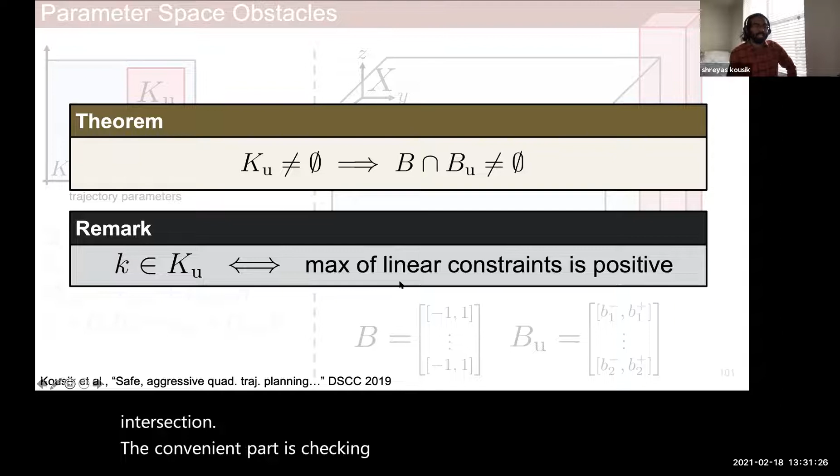So what we prove is if there are unsafe parameters, then these high dimensional intervals have non-empty intersection. The convenient part is checking if I live in the unsafe set is equivalent to taking a maximum over a collection of linear constraints.

So if you took nothing else away from that, basically by representing the reachable set with a bunch of zonotopes that are high dimensional in the workspace and the parameter space, at the end of the day, I can turn everything into a bunch of linear constraints for an optimization program. What that means is that it can be really fast to evaluate online.

So what does it look like at runtime? Oh, go ahead if there's a question. Does this mean that, so we talked about the trade-off of having simpler zonotopes and computational complexity, does having simpler zonotopes here make the collision checking faster? That's exactly right.

You can think of the number of faces of a zonotope as really what matters, and that number is exponential in the number of generators. So simplifying the zonotopes is super duper important. I haven't worked on this myself, but there's a lot of techniques for what they call order reduction, where you're over-approximating a zonotope with a new zonotope with fewer generators. And we do apply those techniques in the offline computation.

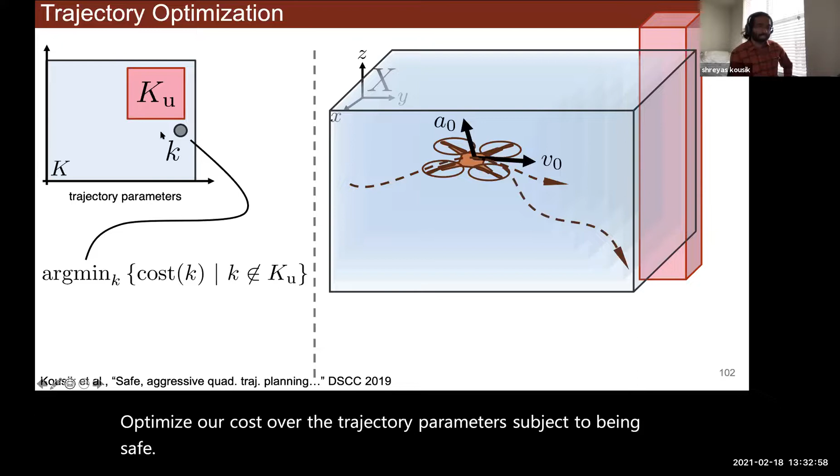Cool. All right, so how do we use this object online? We're always solving the same problem: optimize our cost over the trajectory parameters subject to being safe. A solution may look something like this, and then we know that the robot should not crash. We assume at time 0 we can just hover in place if we need to. So as long as we start out with something safe, then we can prove that the robot will never crash.

All right, before I get into what it looks like, does anyone have any questions? This is the end of the drone section. I have one question, I forgot to ask about the trajectory. How do we find the optimal trajectory parameters? This is not necessarily a convex function, right? That's exactly right.

I don't think I have any slides about it, but anyways, in general what I've done is use fmincon or IPOPT or a generic nonlinear solver, and then usually just hope that it gets to a feasible solution quickly. The nice part is all of my work has cared entirely about collision avoidance and not about optimality until more recently. So in general, you're right, we're solving a non-convex, nonlinear optimization program, and there's no optimality guarantee that will choose the best trajectory parameter. But we can often find a feasible parameter really, really quickly by descending along the constraint gradients. Does that make sense? Yes, thanks.

Okay, the nice part is I had a paper come out recently in TRO, which is referenced at the end of the talk. We can use a different approach to nonlinear optimization. As long as our cost function is a polynomial, we can provably find the optimal solution really, really fast with parallelization. And that's what we call RTD star.

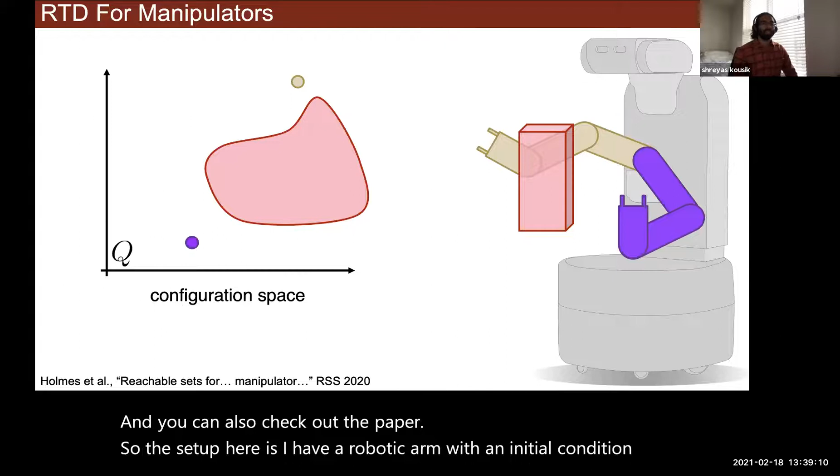Cool. On the manipulator side, I'll just do this entirely with cartoons, basically. But there are more detailed slides available that I can send along later, and you can also check out the paper. So the setup here is I have a robotic arm with an initial condition in purple, a desired goal in gold, and then some obstacle that it has to get around. The idea is, as always, to compute a small reachable set for a parameterized family of trajectories. And that may look like this blob in the robot's configuration space. So here on the left is a cartoon version of all of the joint angles of the robot, Q.

As before, we take our little tiny forward reachable set and intersect it with the obstacles to identify unsafe choices. Then, given a waypoint we want to reach, which may not necessarily be safe, we optimize within our safe set to find a trajectory that goes around the obstacle. We keep doing this procedure, and eventually we'll get past our obstacle, hopefully, and get to our global goal. The hopefully part is where the optimality question from earlier comes in.

It turns out that by pairing this type of RTD approach with an RRT star or A star dynamics-ignoring search, you can create the waypoints that get your robot around obstacles to the goal, and then track those waypoints safely with RTD.

The challenges for manipulators are that we need this high dimensional planning model. We need to consider all of the joints of the robot, and there's a nonlinear transformation to go from the configuration space to the workspace. So collision checking one configuration is not so bad, but collision checking the continuum of configurations resulting from a trajectory can be pretty tricky.

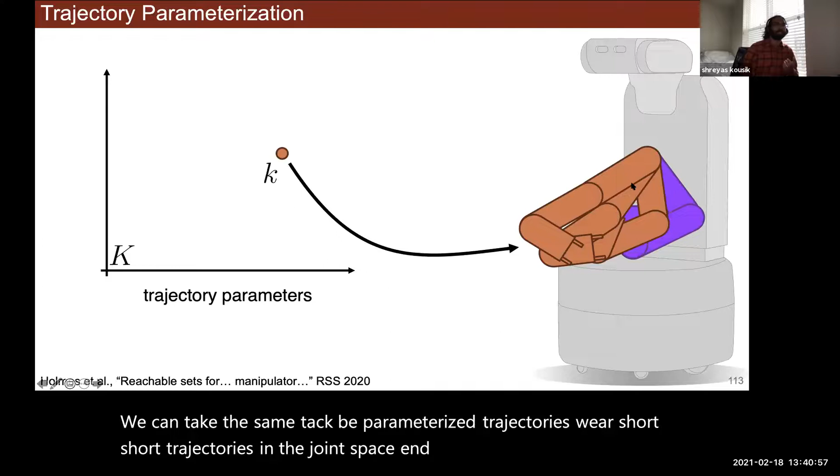We again take the same tack. We parameterize trajectories, where short trajectories in the joint space end up being short trajectories in the workspace. The particular parameterization is very similar to what you saw with the drone. We consider the initial velocity of each joint and a commanded acceleration of each joint.

Then in the joint space, let's say for the ith joint, a velocity profile might look like this, where it accelerates from the initial velocity according to the commanded acceleration, and then after our amount of time, t plan, brakes down to a stop.

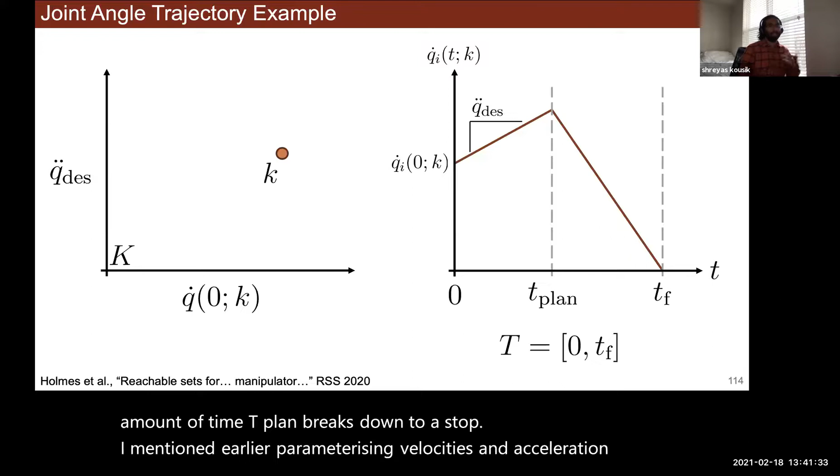So like I mentioned earlier, parameterizing velocities and accelerations turns out to be really convenient for every robot we've looked at. However, directly computing a reachable set of such trajectories in the joint space makes it very hard to map those reachable sets to workspace, because you have to do a nonlinear transformation.

So what we did instead is compute the reachable set in the space of sines and cosines of each joint. If I pick a trajectory parameter, a single trajectory may look something like this, where it travels along the unit circle for this particular joint shown. And then for the continuum of trajectory parameters, we get this arc of the unit circle swept out. We can call this object the joint reachable set for a single joint.

We also represent this as a sequence of zonotopes. So what we end up with is, it's a lot tighter than in the cartoon, but we end up with a thin strip of zonotopes on the unit circle.

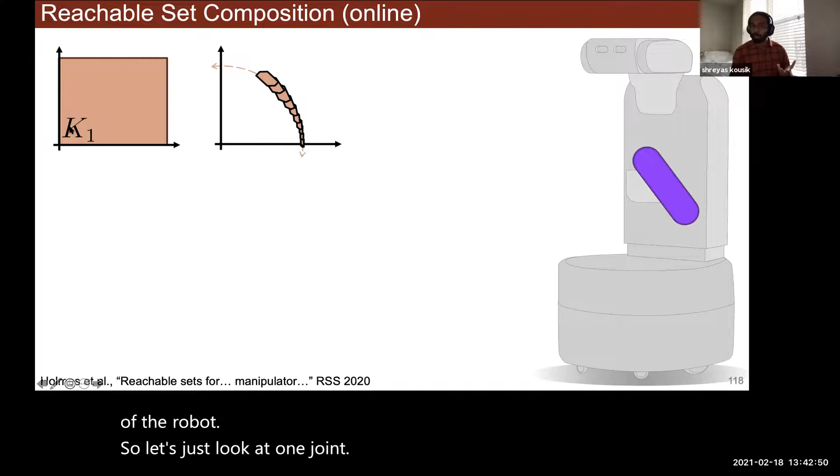Now, because we represented the sines and cosines, the building blocks of the nonlinear transformation from configurations to workspace, we can actually use those to compose a workspace reachable set of the robot. So let's just look at one joint with, let's say, a parameter space K1 and this little joint reachable set that you saw in cartoon form.

The first thing we can do is, working in this high dimensional space, we can turn these objects into rotation matrices. Since we're holding on to sines and cosines, you can just reshape these zonotopes. And then we define what it means to multiply a zonotope by another zonotope, which ends up producing the workspace volume that we cared about, this cartoon volume in workspace for the first link.

So given the volume of this purple link, I can multiply it by some transformation of this sequence of zonotopes to produce the swept volume of that link. The reason this matters is because I care about what portions of the swept volume live outside of obstacles.

If I rinse and repeat for the second link, and then the third link, I can produce this swept volume object, where I have an initial configuration of the arm with initial velocities, and then for all possible choices of trajectory parameters, I know that the arm is going to live inside the union of these blobs.

We call these objects rotatotopes, because what we're doing is constructing a zonotope of rotation matrices and then multiplying it times a rotated or swept volume. It turns out it's a special case of polynomial zonotopes, and polynomial zonotopes are just like regular zonotopes, but the coefficients are allowed to be polynomials. If that meant nothing to you, don't worry about it. Just remember rotatotopes, because it's the most fun word we've come up with in our research so far.

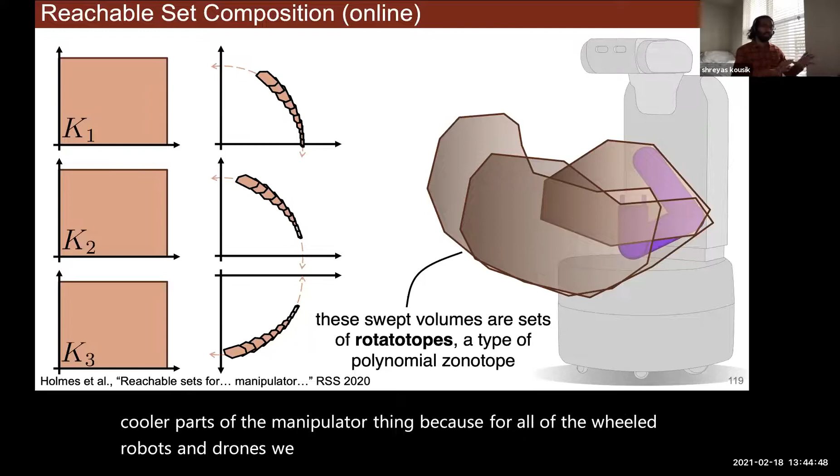All of this composition, like stacking the reachable set together, actually has to be done online, which is, I think, one of the cooler parts of the manipulator work, because for all of the wheeled robots and drones, we had to do all the reachability offline. But here, we're creating the reachable set on the fly at runtime with GPU parallelization.

We applied the same procedure you saw with the drone to generate those collision avoidance constraints, intersecting high dimensional zonotopes and projecting the intersection into the parameter space, then creating a cost function, such as reaching that goal position, and optimizing over the space of trajectory parameters.

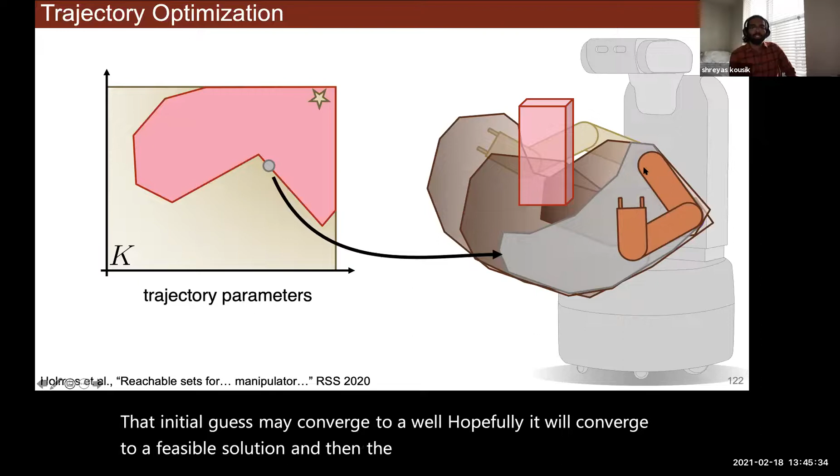Given this initial guess—because as one of you noticed, these are non-convex nonlinear programs, so we give them an initial guess—that may converge, hopefully, to a feasible solution. The corresponding subset of the reachable set in gray is a trajectory that avoids the obstacle while still tending towards the goal. That was the entire cartoon version for the manipulator case, and hopefully it makes sense in the context of the wheeled robot or the drone. But are there any questions?

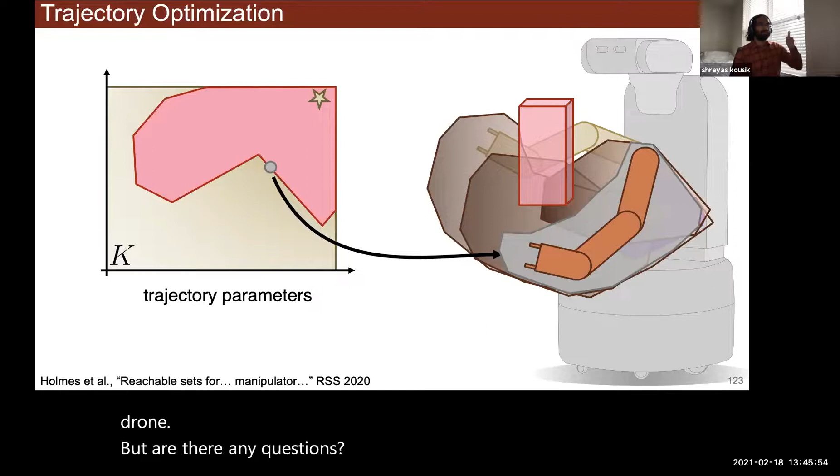Okay, fun video time. Here you'll see this Fetch arm trying to get from this low shelf to the high shelf without hitting the shelf itself. The arm is shown as the robot sees it, in blue. That gray subset of the reachable set for the current trajectory is in gray. Each intermediate waypoint the robot is trying to reach is in black.

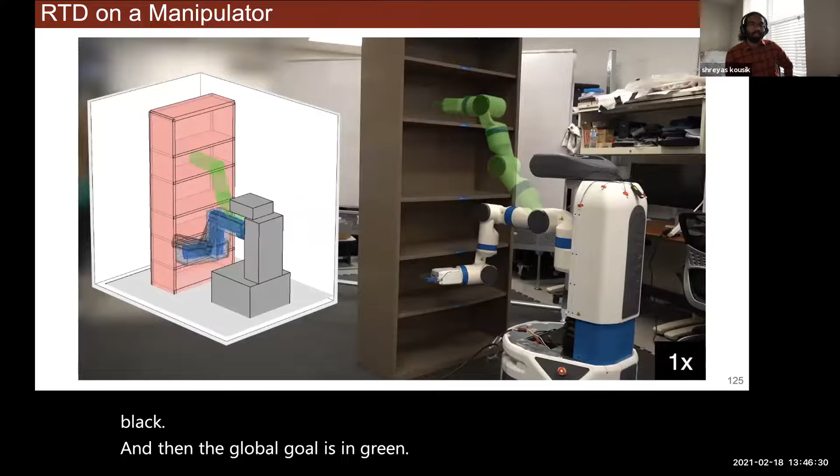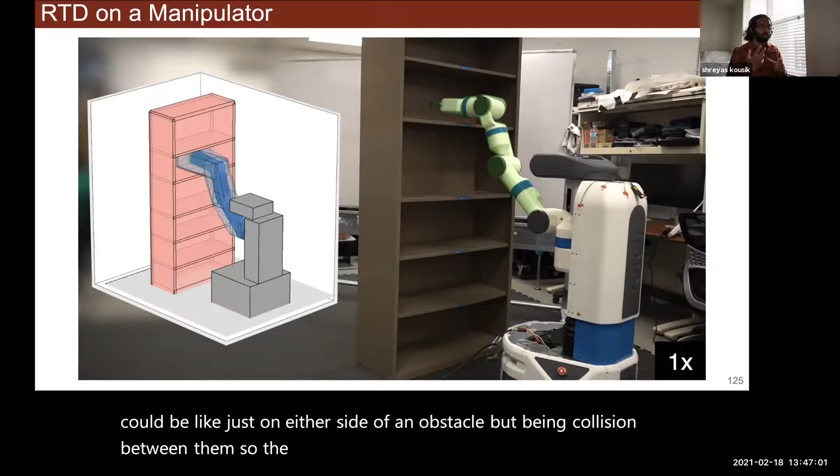Given a good set of waypoints, which can be found pretty quickly with, for example, A-star search, the robot can basically do a perfect job and not hit any of these really thin obstacles. The reason I say thin obstacles is because if I were to discretize in time, it becomes tricky to say I've avoided collision between a pair of discrete times. I could be just on either side of an obstacle, but actually be in collision between them.

So the fact that we're considering continuous time is actually super duper important in this case. The other nice thing is that we can sit on top of an RRT, a deliberately unsafe RRT, and turn it into a safe RRT.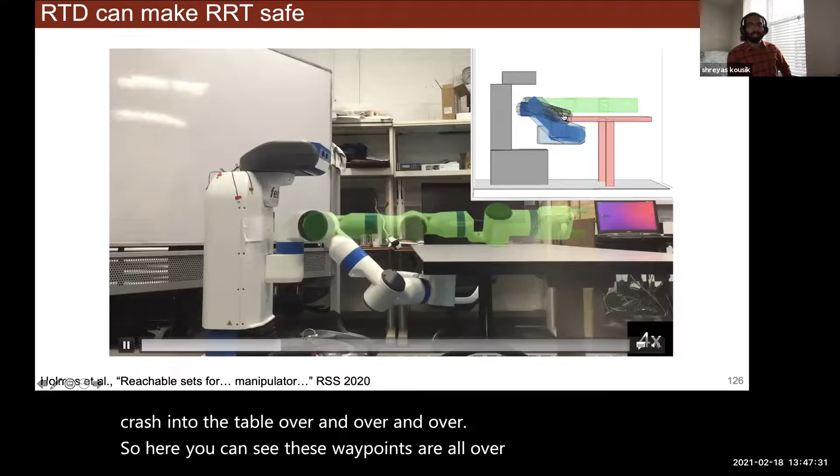Here you'll see the robot trying to go from below the table to above the table. The RRT we use to generate waypoints is basically telling it to crash into the table over and over. So these waypoints are all over the place, kind of messy, and we're doing as best we can to track them. As soon as the waypoints start to turn good, we track them right over the table.

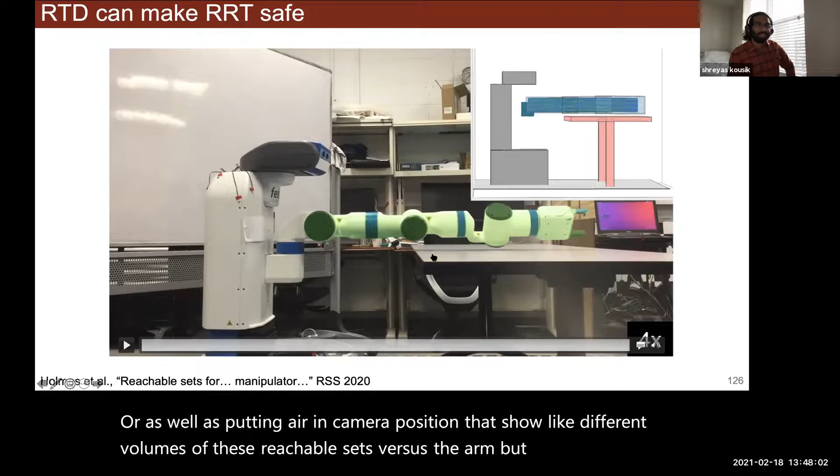The nice part is we're also not super duper conservative, though I'll point out there's a plotting error here, as well as camera position issues, that show different volumes of these reachable sets versus the arm. But the big takeaway is that the arm never crashed into anything over many, many dozens of times trying this out, which is pretty fun to see.

Okay, so I'll skip over the comparisons to other methods and focus on the key questions. But to summarize RTD as a whole from the whole talk...

The challenges we addressed were planning with respect to tracking error, meaning model mismatch between our planning model and our high fidelity model of the robot. We considered continuous time and space collision avoidance by being clever about how we discretize. And we developed obstacle representations via discretization or zonotopes that enable fast, real-time trajectory planning with safety guarantees. So if you apply these techniques correctly, you have provably safe, real-time, continuous time and space trajectory planning, and you can incorporate tracking error and represent obstacles.

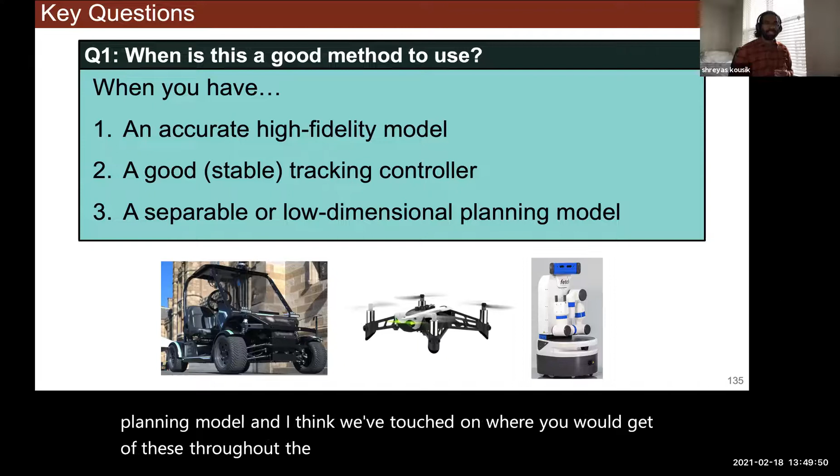So when is this a good method to use? When you have an accurate high fidelity model, a good tracking controller, and a separable or low dimensional planning model. I think we've touched on where you would get each of these throughout the talk.

But turns out that we have those for all three of these robots, except the drone. Sometimes you just have no clue about your dynamics, or you have something very unexpected appear. Or you don't know how to design a tracking controller, like perhaps for a soft robot. Or you have really large model uncertainty that can lead to very high conservatism. When any of these apply, usually what I would do is really try and find a good model or design a good tracking controller, or otherwise reduce the uncertainty.

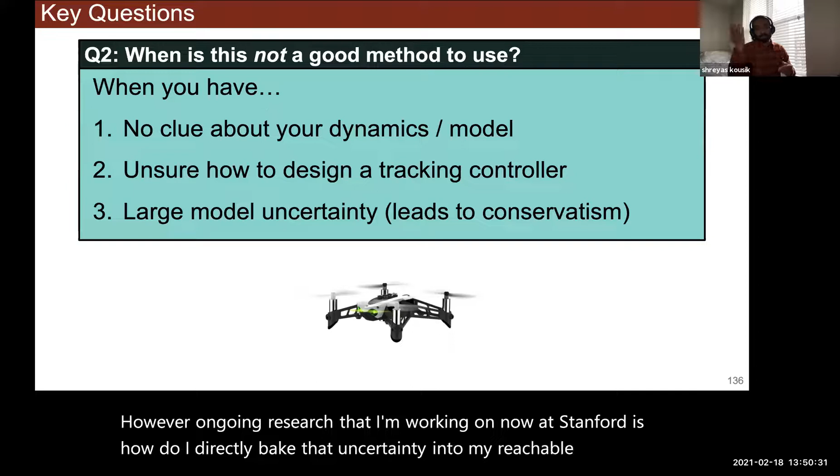However, ongoing research that I'm working on now at Stanford is how do I directly bake that uncertainty into my reachable set? And that's something maybe you all can think about as well.

Everything you've seen up until now deals with bounded model uncertainty, but we haven't considered perception uncertainty or unknown disturbances from outside of the model. So perhaps a world model.

But the drone does actually do flips, not with RTD, it's just a fun feature of the drone.

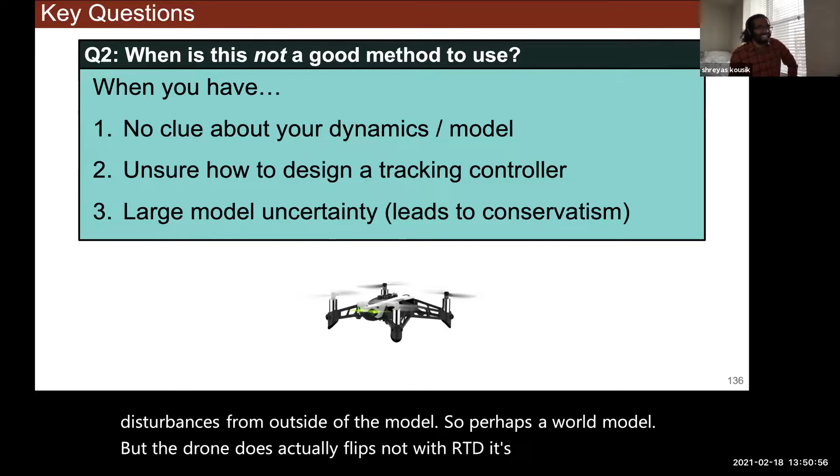Much as we saw on the planning side, on the perception side, there's this trade-off between accuracy and speed. Often you'll see approaches like YOLO or something that are doing one frame at a time, finding whatever's around you, but struggling to enforce consistency over an extended chunk of time. So getting all of the things working together is still really hard. That's still why we don't have autonomous cars everywhere.

I would say that the hardest part of all of these ongoing challenges is going to be incorporating uncertainty in a meaningful way into perception and planning. Hopefully, I don't know if anybody has strong disagreements with any of these statements. They're pretty banal as far as I'm concerned, but that's been my take.

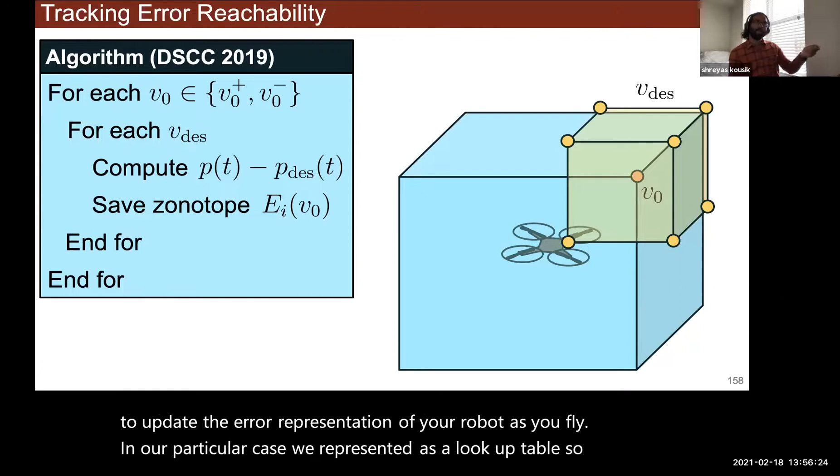When you're flying the drone, you're still just sampling velocities, so you can continue to update the error representation of your robot as you fly. In our particular case, we represented it as a lookup table, so it's super fast to both update and reference. But you could learn a function via support vector machine or neural network that spits out a sequence of zonotopes — it'll depend on the architecture whether you can backpropagate through it in real time. But learning for safety, at least in my understanding, means computing this reachable set and updating it on the fly, and that's totally doable with the current code.

Unfortunately, that was right when I moved to Stanford, so I had to drop that project. If anyone wants to do it, go for it.

Other questions? I had a question regarding the manipulator stuff. A lot of your work seems to focus on object avoidance. So regarding actually interacting with objects, do you have thoughts on how to deal with changing dynamics when you interact with objects, or cases where you don't necessarily want to avoid certain things, but like a curtain you can pass through to some degree before it becomes unsafe? Thoughts on things like that?

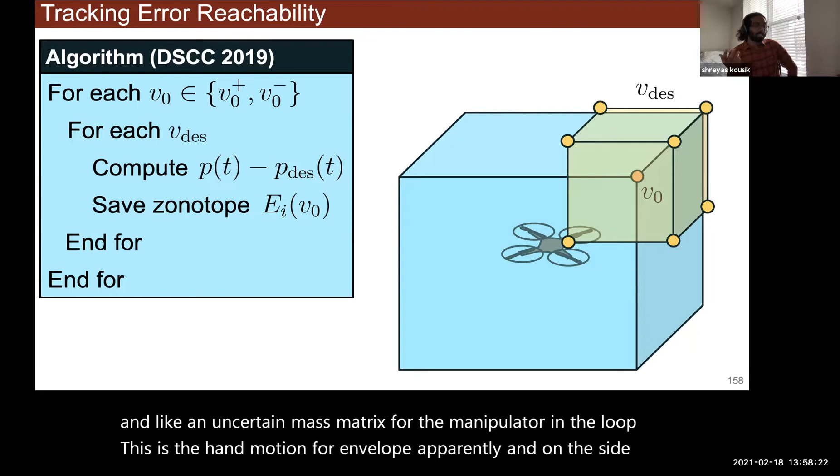So you can provably optimally find, in the quadrotor case, the trajectory that goes in and perches, or guarantees you interact with an object. Your cost function could express something like how fast you hit it. So that's one way to solve it.

On the soft object side, like a curtain, I would say we just wouldn't worry about it — we would just not model it. You could construct a cost that made the arm go from left to right near the curtain and not model the curtain at all. That seems like the easiest approach. If you know something semantically — if your perception system tells you, hey, I don't even care about this thing, it's not a real obstacle — then if you never hand RTD an obstacle, it won't care about it.

The tricky part is what happens if you pick up a pool tube or something squishy and foamy? It's hard to model. If you can generate reliable predictions of what will happen when that object is interacted with—which Dmitry Berenson at University of Michigan has a lot of work on—and if you can model with some fidelity what's going to happen to the soft object, then you can incorporate that into the cost function. It'll be harder to incorporate into the collision avoidance constraints. For example, plucking a string without breaking it or missing it—that's gonna be really hard. I think it's an interesting question. Hopefully that gives you a feel.

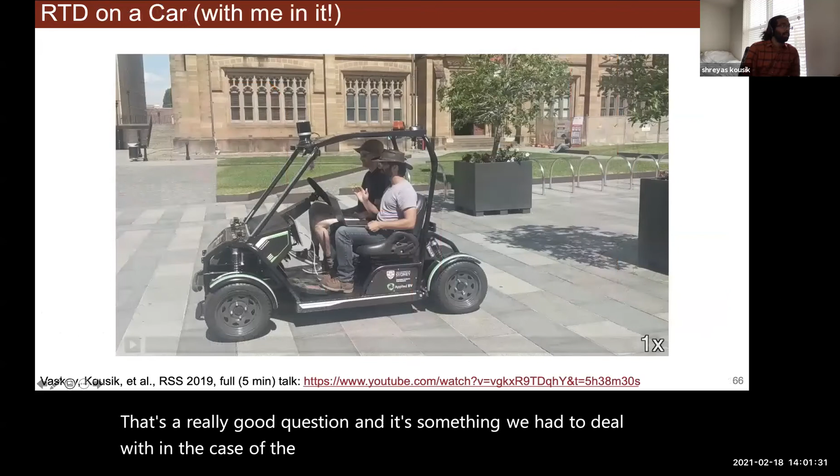That's a really good question, we've actually had to deal with being conservative. It's something we had to deal with in the case of the electric vehicle. Our high fidelity model wasn't accurate all the time—it was accurate within 10 centimeters all the time. We found from data, driving around in a place without obstacles, that our high fidelity model was 10 centimeters accurate. We buffered every obstacle by that additional 10 centimeters, which kept us out of collision. I can promise you we didn't crash at all.

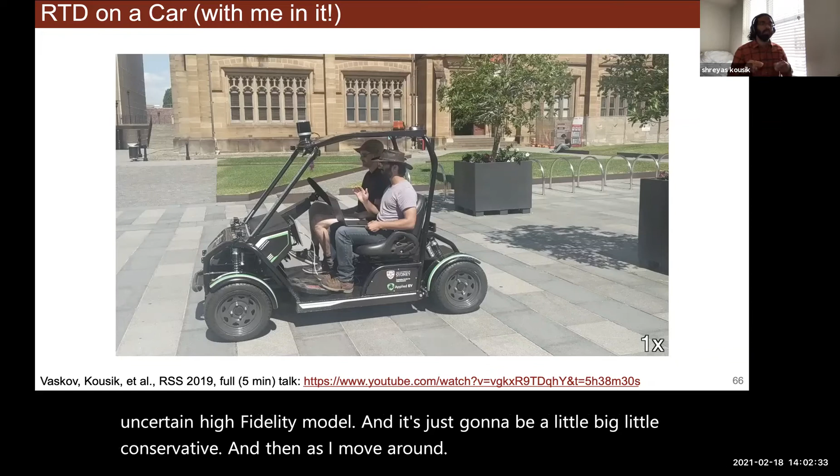But ideally, what I think would be really cool is to directly compute the forward reachable set for the high fidelity model, and be able to do that fast enough that as you improve the model, you can reduce the size of, for example, an uncertain parameter set. That's exactly what we're doing for the manipulator—not published yet. We say, okay, my mass matrix is uncertain, but I can compute a forward reachable set for the manipulator with an uncertain high fidelity model. It'll just be a little bit big, a little conservative. Then as I move around, I can hopefully recompute the forward reachable set in real time with a smaller uncertain bound on my parameters.

The way I've implemented that specifically here at Stanford is for the drone case, where we're running what we call a zonotope Kalman filter—just like regular Kalman filtering, but instead of updating a point estimate of your state, you're updating a set estimate represented as a zonotope. I can send a link to that talk, but one way to do it is to say, okay, I know I have model uncertainty—let me keep recomputing the reachable set at runtime, and then use a Kalman filter or other filtering technique to continually improve my model as I get more data.

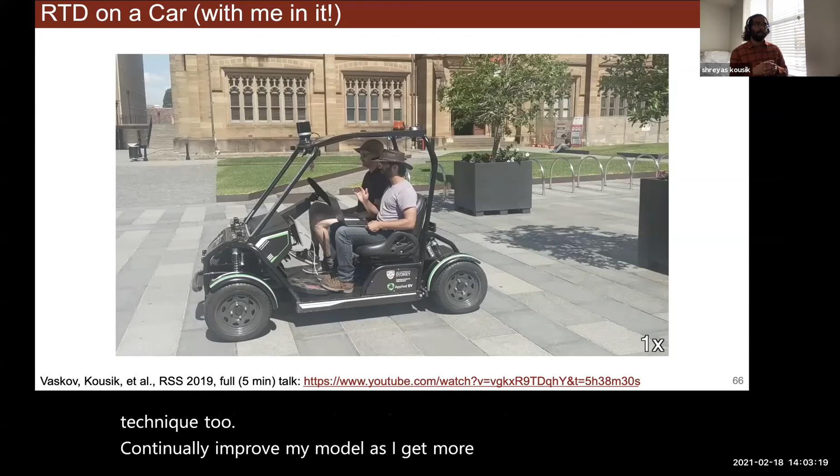None of this requires any learning, none of it requires any machine learning, which is nice, and is quite related to Sylvia's question earlier of how do you learn for safety. All of this stuff is just updating set representations of the robot. The next frontier then is how do you do this with machine learning techniques and still hold on to any guarantees? I don't know.